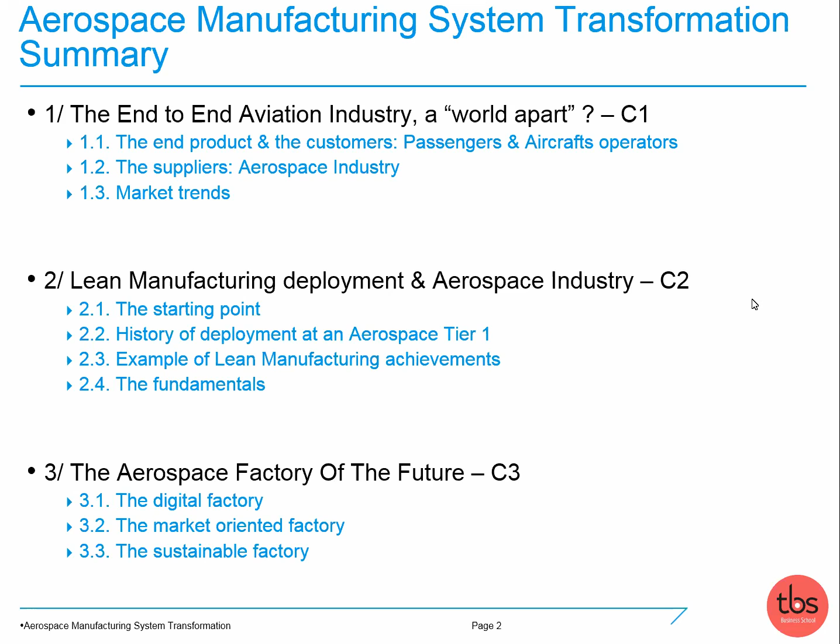Yes, perfect. Okay, so thanks, and let's jump into the topic now. So the first course is, as said, an understanding of this specific sector of aviation.

I raise the question because to a certain extent it's a specific sector. In many aspects it's one industrial sector like many others, but I will try to explain what makes it a little bit different from the others.

The first chapter will be on the customers, ourselves as passengers, and the aircraft operators. I will mainly focus on commercial aviation, so aircraft operators will be airlines, but I'll say a few words on the other aircraft operators, which are the air forces from the countries or the space system companies.

The second chapter will be on the suppliers. This will be more industrial, not really technical, but we'll be talking about what is around the industry. Then the last chapter will focus on the market trends in this aviation sector.

For the end customer that we are, and the airlines, what is an aircraft? If I take the example of the A380, the last aircraft will soon be delivered by Airbus, but there are 250 aircraft flying in the world. It's a fantastic aircraft, I had the chance to fly on it once some years ago, and it will fly for probably several decades. So I'm sure you will fly on it, and it will pull many MRO businesses, many cabin refurbishments, because a cabin on that kind of aircraft is changed every 8 years on average.

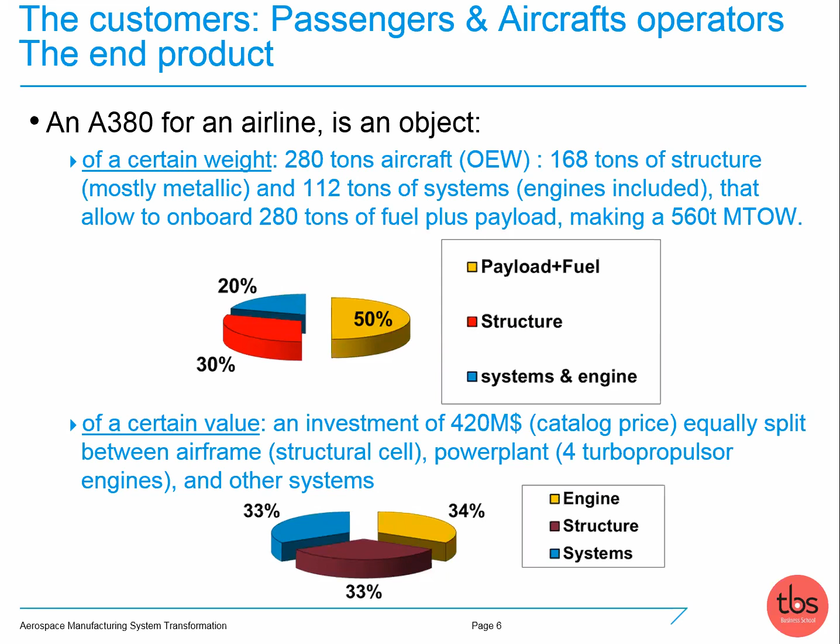So that's interesting to note, the engines are a big part of the price of the aircraft, which means that from a cash perspective, and because Airbus or Boeing or the aircraft manufacturers are not making the engines, you may imagine that they will have a supply chain approach to minimize the cash from the engine procurement and to assemble it at the latest time. But we'll come back to it later.

Okay, of course it flies, but this is important. This means that unlike a train or a car, it is surrounded with more potential danger. Danger of dropping because of a flying failure, and this would mean danger for transported passengers and goods, but also for the population that would be exposed to a crash.

But also it's a danger in terms of what you can see from being above, because an aircraft is flying over territories that in many cases are national territories. And on all national territories, there are safety areas that you don't want some foreign entity to look at, to make pictures of, or to approach.

So for all these reasons, aviation transportation is a sector that is closely monitored by very important public authorities that are constantly seeking zero risk operation.

So if we continue to look at the market from the customer perspective, what are the passengers and the airline expecting from, what are the expectations from a product utilization point of view?

The airlines, of course, are pulled by the market evolution, and they are trying to offer the best product so that they follow the market trends. First, since several decades, they have worked on the fly hour cost. This is obvious, by playing on fuel consumption, reducing it, seat density, more seats in an aircraft, aircraft weight, lighter aircraft, better efficiency of aircraft use, working on operational performance, on reduced maintenance time, so that the aircraft can fly most of its time.

This has pulled the business activity of the MRO, which are the companies delivering, among other things, maintenance services. This has also pulled changes in the aircraft architectures, pushing the emergence of new versions of aircraft, new aircraft, and you have here an illustration of

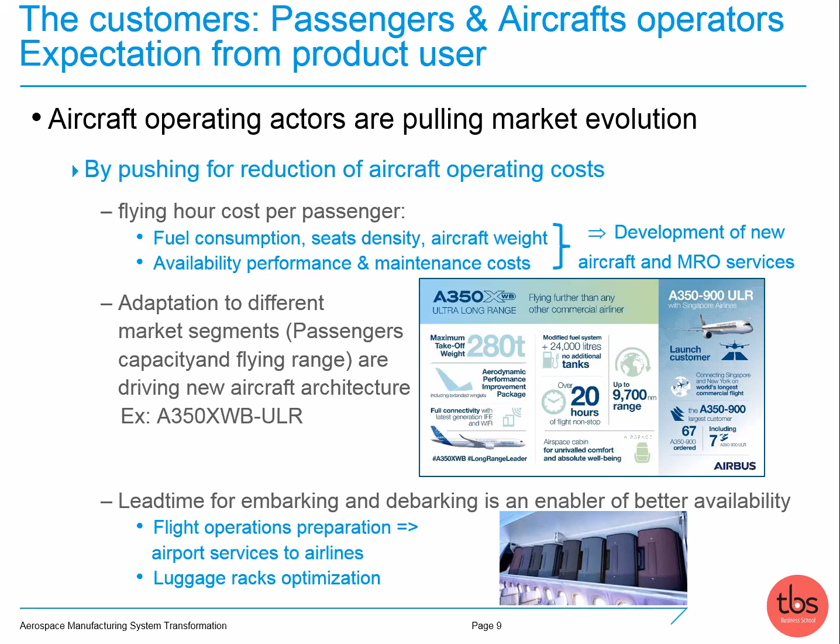They have worked also, Airbus, on the luggage volume with improved storing of luggage.

Also working on reduction of fuel burn in taxi operations at airports. All aircraft are using their fuel engines to move on their wheels on the airport, and electric systems to drive the wheels are being developed to be a CO2 free system

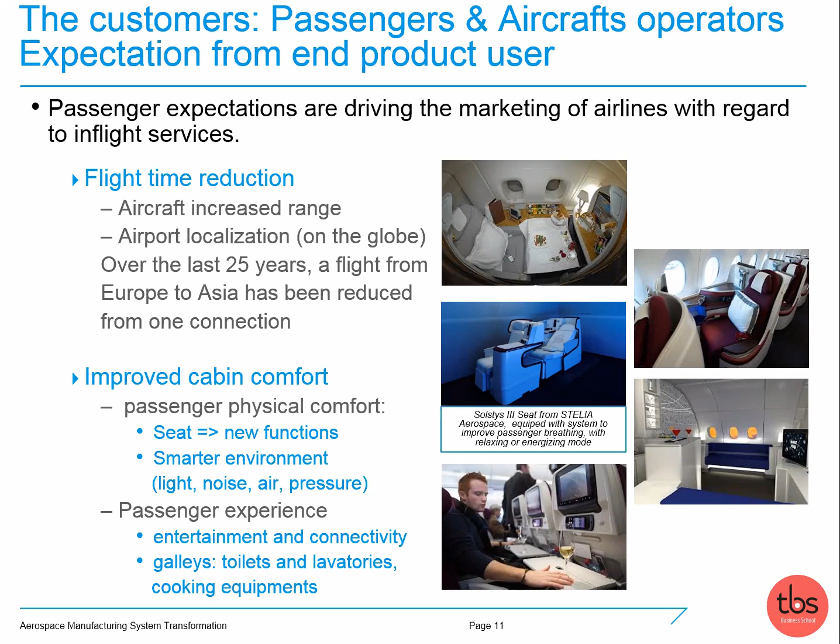Also, to reduce price of tickets, there has been the emergence of low-cost airline operators. This is about a 20-year-old segment, maybe a little less, about 20 years. If I take the price of tickets you can buy today at a major European low cost to fly to Paris, Berlin, or Amsterdam from Toulouse, the lowest price you can get, I definitely could not get in the best case when I was in Toulouse school 30 years ago.

Embarking time: I used to come 2 hours ahead of the flight takeoff to the airport. Now you know that you can come 45 minutes, or if you like to play, maybe 30 minutes in Toulouse. So this has greatly improved, and many other services in the airport are very attractive and efficient.

Short video about the A350, an aircraft introduced in 2015 in terms of commercial operation with Qatar Airways. There are now about 400 aircraft flying in the world. Airbus has sold close to 1,000 aircraft, so they still have a backlog of 500 aircraft to deliver. And even in the tough present commercial times of post-COVID for the aerospace industry, they still have delivered this year about 40 to 45 aircraft, so it's not that bad.

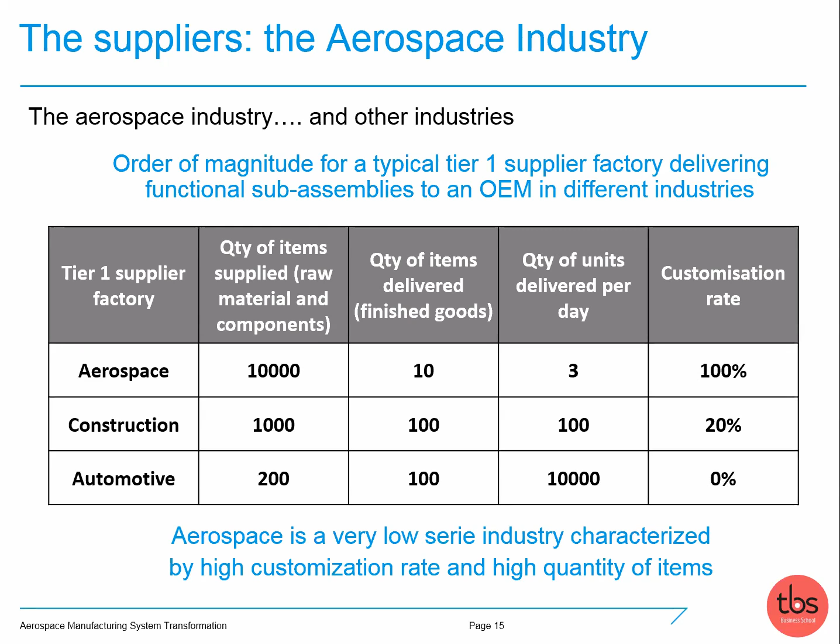And going with that, you have customization. The 3 landing gears will not be the same, the 3 aircraft are not the same. In the 10,000 automotive parts, they are not all the same, but you may have 1,500 steering wheels that are the same for Ford or whichever car.

In the aerospace segment, probably the major specificity is the importance of product development. I told you for the A350, development starts in 2008, first entry in service end of 2015 - close to 8 years of development, with dozens of billions of euros. For Airbus, it was close to 15 billion euros. For Stelia Aerospace, one tier supplier, it was $500 million.

Among the R&D costs, the factories, the engineers - up to 700 people in the design office. So it's massive. Hexcel has been developing and is manufacturing 53% of the composite material in an A350 aircraft, so many tons of composite materials that we deliver to Airbus every day.

This is a $1 billion investment. As an example, within that billion you have several composite plants, 500 meters long, several hundred million investment each, with highly complex chemical processes to produce a specific carbon fiber that is weaved, impregnated, cured and assembled finally to make the panels. So this is the first important thing: massive investment, massive development challenges.

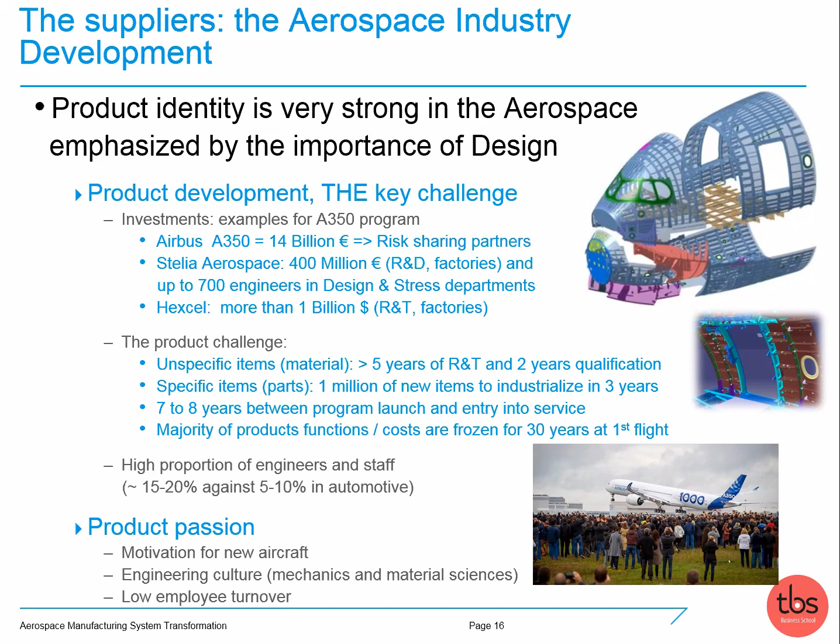Another dimension of this complexity is in the IT infrastructure. Information technology is used to manage all the data and all the tasks, because as long as you have more than one employee, part of the job is to communicate between people, functions, departments, plants, subsidiaries, customers, suppliers - and to do that efficiently you need tools. The tools supporting communication are, in many cases, information technology tools, designed according to the nature of the object you want to communicate.

An object can be very various. When you think of a 3D CAD model developed in software like Dassault Catia, or the new Dassault 3DX solution, this is about creating a shape, a 3D shape, a volume. If you talk about other data dealing with business measures, cost, price, you're more in a system for transferring orders of procuring goods, selling goods, distributing goods - and these are more what we call ERP, enterprise resource planning.

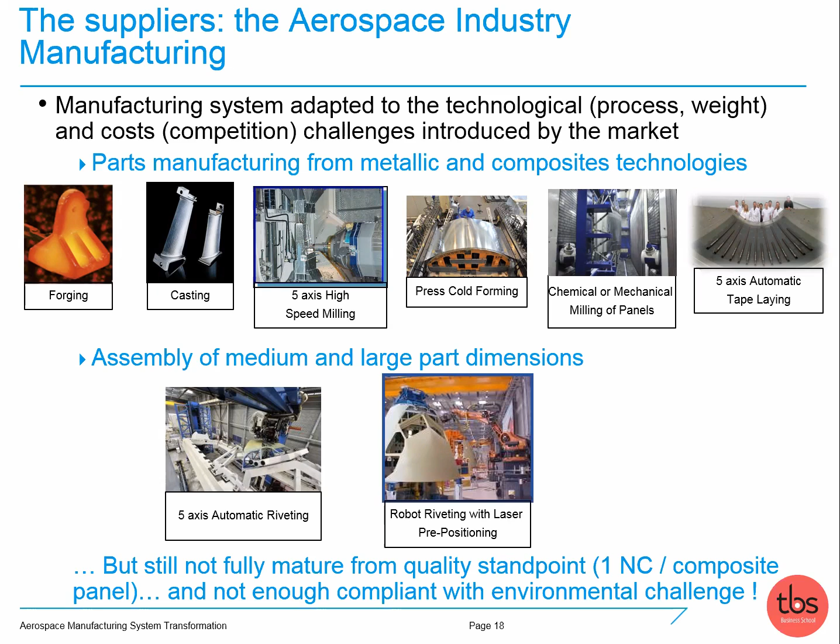Like you may imagine, the place of human is very important on the shop floor. We have a lot of complex automatic machines, but we have many experienced workers necessary to assist, to support, to solve some of the complex technical processes we are operating. And going with this highly skilled population, we have a heritage of competence development that is specific to our sector.

One example is with the words. I will make a small switch in French - I'm sure non-French speakers will be helped by the French one. In all my years in non-aerospace industry, the word to name shop floor employees was workers or operators. In the aerospace industry, at Airbus, at Stelia, at all specific parts companies, you are not talking of operators or workers - you may use the word, but you are really talking of 'compagnon' in French. So not 'ouvrier' or 'opérateur', but 'compagnon', like 'compagnonnage'. This companionship is the heritage of this sector, still used to train a lot of processes.

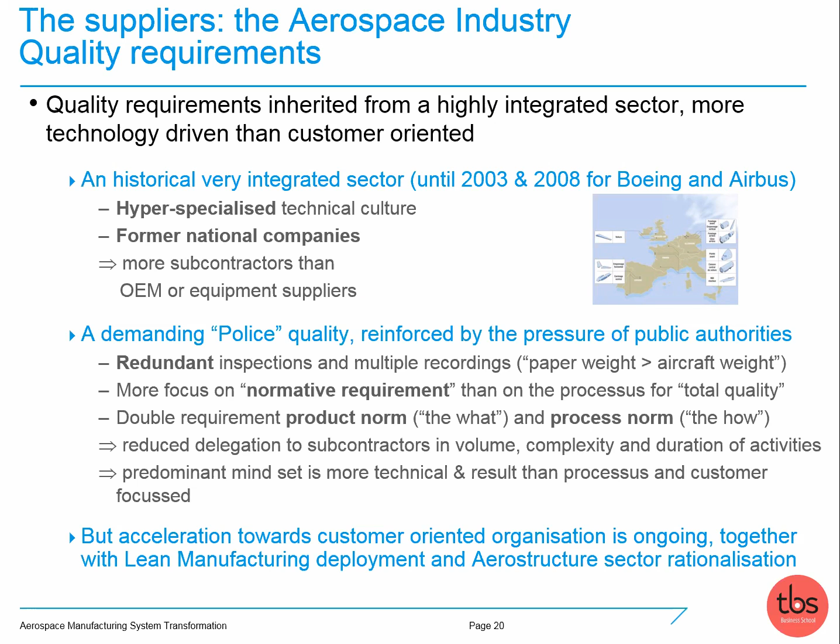And therefore, the kind of quality that we have, with this past and with the big presence of public institutions that monitor our industry, all this explains that our quality is more 'police quality' than 'total quality.' We are more driven by product norms, by a double requirement of how to do and what to do, rather than a total quality mindset inherited from the Toyota system. It is changing - we are progressively coming to total quality, but moving slowly because the weight of this normative culture is very important. So we are entering lean manufacturing, and we'll discuss this again in the second part of today's course, but it's coming slowly.

Another important point of the specificities of industrial players in aerospace is that we are handling big dimensions. So our logistics system, all the systems that manage movement, transport, and storage from one place to another, are working with these big dimensions. It can be trucks, trains, river boats, sea boats, aircraft. In the Boeing world, in the Airbus world, this is always big dimensions.

Because of what I explained previously, being only recently on a competitive industrial market, our supply chain performance, our flow expertise, is less than in other segments. You can find that with typical indicators like inventory turns. Inventory turn is the time to renew an inventory of a company. In our company, you can count it on your hands, so 1 to 5. You may find some benchmark players at close to 10 in aerospace, but it's very low.

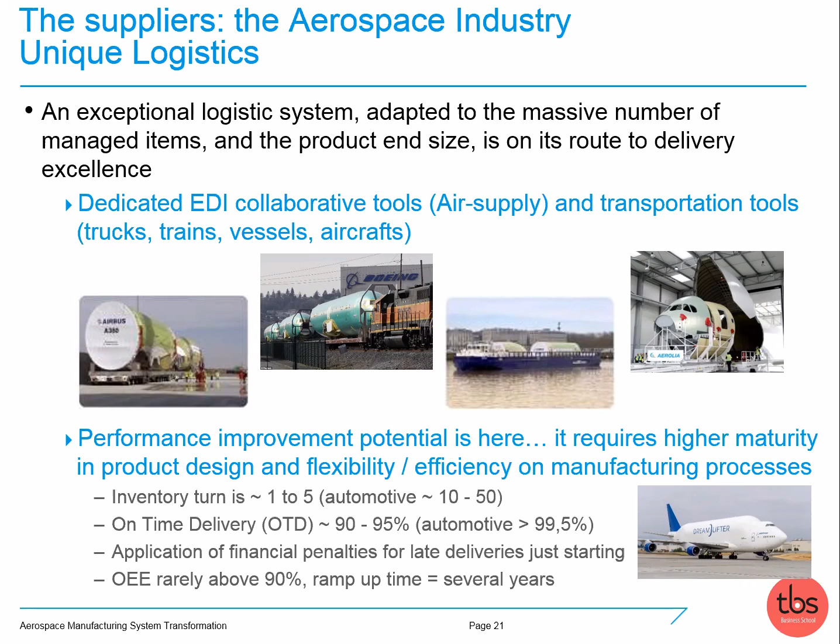On time delivery, the adherence in delivering on time, in other industries like automotive, electronics, consumer goods, food distribution like Carrefour, Auchan, and others, you are higher than 99, 99.5, 99.9. In our industry, we are more in the range of 95. The best suppliers are at 99, but you can count them on one hand. Demanding rules for efficient supply chain, like financial penalties for late delivery, are daily applied in automotive, food, and electronic industries. In aerospace, it's much less frequent because we are not yet at that level of maturity.

Market trends. Quickly, what do we see in this sector in terms of changes, trends, and evolutions? First, and very important, we will talk about this again in the last course, the Aerospace Factory of the Future. It's an incredible sector with about 5% growth since more than 2 generations, since the end of World War II. We have seen increases in activity between 3 and 10%. We have regular crises with world events, geopolitical threats, wars, energy threats, fuel crises, now COVID. But all the time, it has averaged about 5% growth. Will COVID change it? I will not answer now. We could debate that. We will try to share reflections on that in the last course on December 17. So until COVID, it was a sector with incredible yearly growth.

Second, intracontinental traffic is now operated by low-cost companies. They didn't exist 20 years ago, but now they are major actors in this sector. Third, intercontinental traffic has really accelerated over the last decades, mainly with the entry of new actors from emerging countries, mostly Middle East and Southeast Asia. They have an optimized position on the globe, between the US, Europe, and Asia, which enables them, with modern aircraft, to fly without stop from one capital to another. And I won't even comment on the price of kerosene, which in some countries is, unofficially, lower than in others.

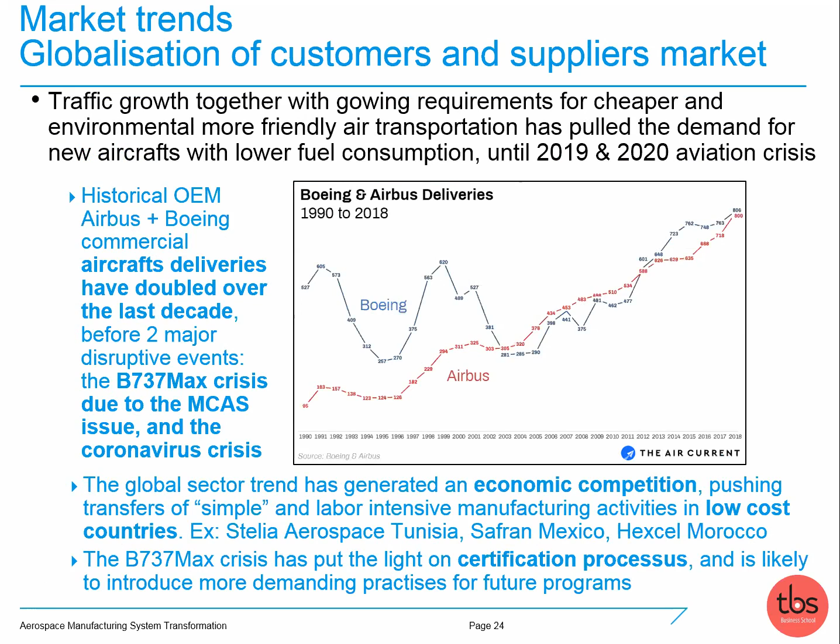Definitely, it is a crisis with an amplitude that we have never lived in aerospace in history, in aviation history. And not only by the amplitude, but also by the duration. And why it will last long, it's because it is a simultaneous pandemic, economic, and geopolitical crisis that affects us.

The pandemic measures are reducing the air travel, as you understand, of course. The economic crisis caused by the pandemic crisis will reduce the ability of citizens and companies to spend money for air travel. The confinement measures are also pushing home office and video conference means as a substitution system to travel, to missions, to physically meet customers or your partner. And last but not least, the general tension between the countries is also placing borderline constraints that are additional barriers to air travel.

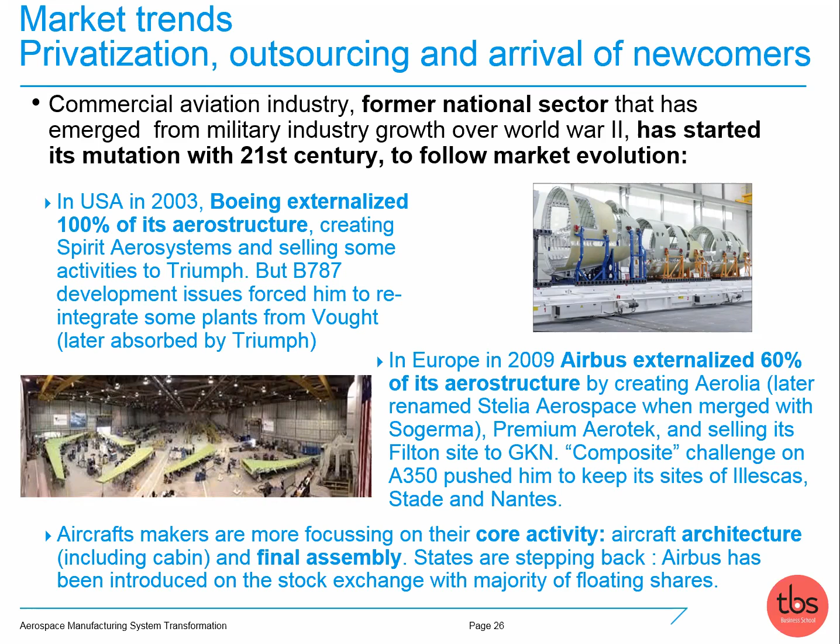In regards to the military market, a few words on that. Military sales around the globe are monitored with several laws, and one of them is offset laws. When a selling country, or a selling party, is having business with a country for a military product, the selling party must give compensations along with this military business. These kinds of laws typically explain the Dassault-Reliance deal that goes along the sale of 36 Dassault Rafale to India. And this has a little bit influenced the commercial markets with what we call compensation markets.

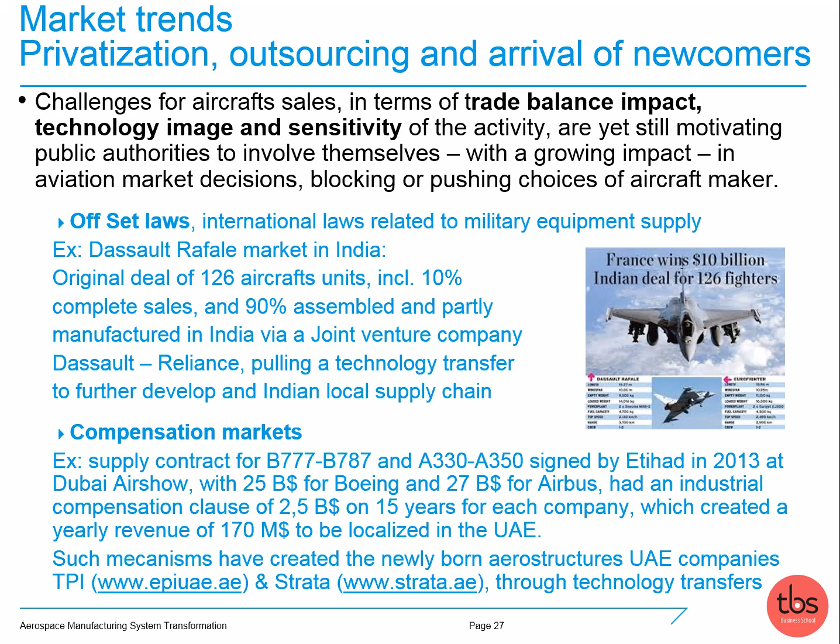So it's not laws, but a similar business practice that started to appear by the end of the 90s with China, and grew to big dimensions in the beginning of the 21st century in the Middle East, where airlines like Etihad, supported by Abu Dhabi, Emirates, and the UAE, have forced Airbus and Boeing to give big compensation of business against the sale of large numbers of aircraft. This has pushed the creation of completely new actors, like the two company names on the slide, that were born thanks to technology transfers operated by Airbus and Boeing to enable them to enter the playground of aerospace industrial countries.

Other changes in the aircraft industry: because of the growth and nice health of this business until last year, there were a lot of companies trying to enter the segment of commercial aircraft of more than 100 seats. It was the case of Bombardier with the C-Series, of Comac with the C919 in China, and of Embraer in Brazil with the E2-195.

I won't tell the whole story, but you can notice that to prevent entry of a third player, Airbus and Boeing played a certain number of cards, trying to distance Comac with the A320neo and the B737 MAX, improving aircraft efficiency to distance the C919, which would be more comparable to an old A320 or B737. Also, Airbus has taken over Bombardier's C-Series, now named A220, so they have killed that competitor. Boeing tried to do the same with Embraer, but was prevented from doing that because of the COVID crisis.

Let's see what comes in the future. So they are trying to compete and keep this duopoly, which is of interest to them, but which is really a specific case. All those businesses are driven by dollar, it's not a place for euro. There are also big corporations, like CFM with GE and Snecma, a 40-year-old corporation, as an example. And there are a lot of relations with states when it comes to the defense market.

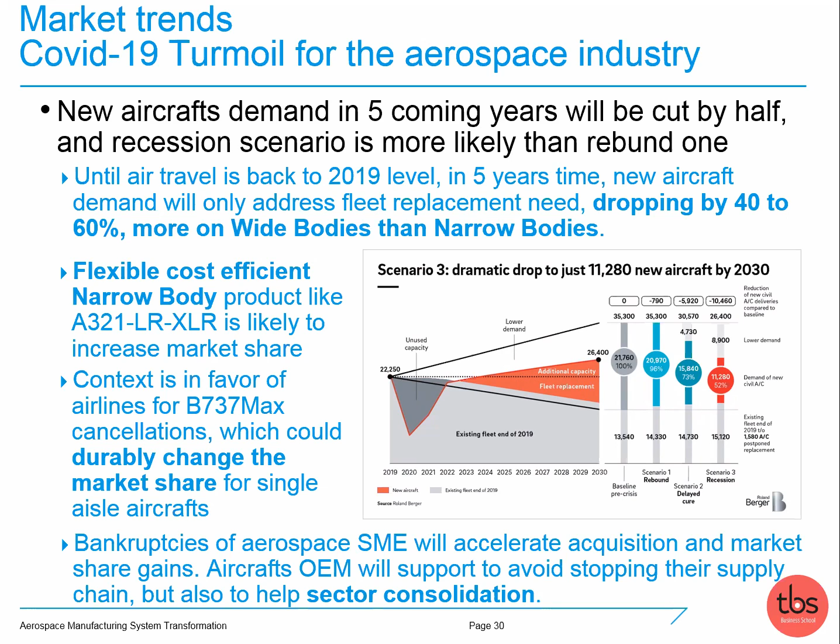Again, we'll see that. Trend for the future: aviation transport will push changes in the services industry around the airports. Some people are talking of aerotropolis evolutions, which is, I would say, an evolution of the geographic systems around an airport that combines airport operations and urban areas. Let's see, there are big projects. Some have opened, like the new Istanbul airport, and in Dubai they also have a big project.

There are big projects coming with UAM. Lilium has announced a project for an aerotropolis zone in Florida, US. This was some days ago. So they think of an aerotropolis urban organization around their Lilium Jet taxi future service. UAM is a new segment. Many operators—most of them will not survive, but several will be successful. They will address short distance range, they will address urban taxis. Let's see, it's a complex and very interesting future segment.

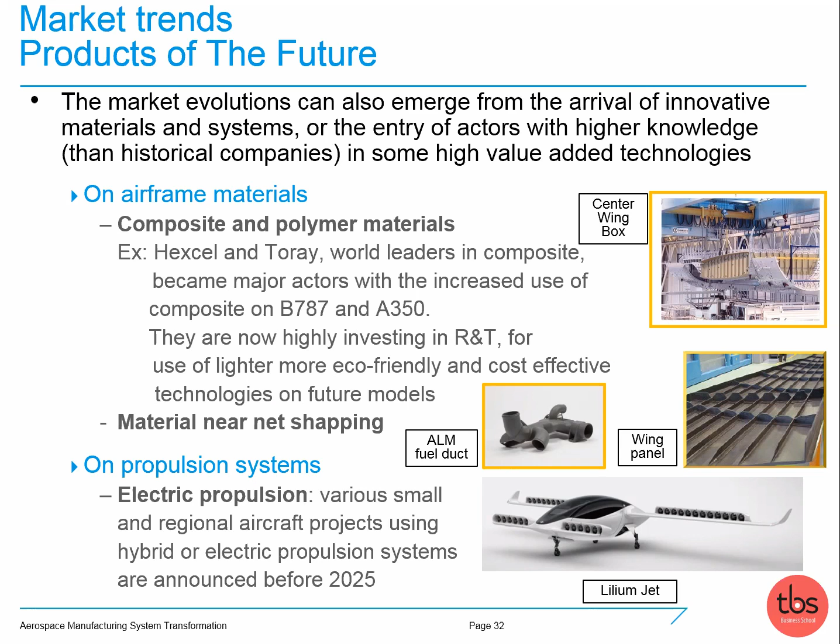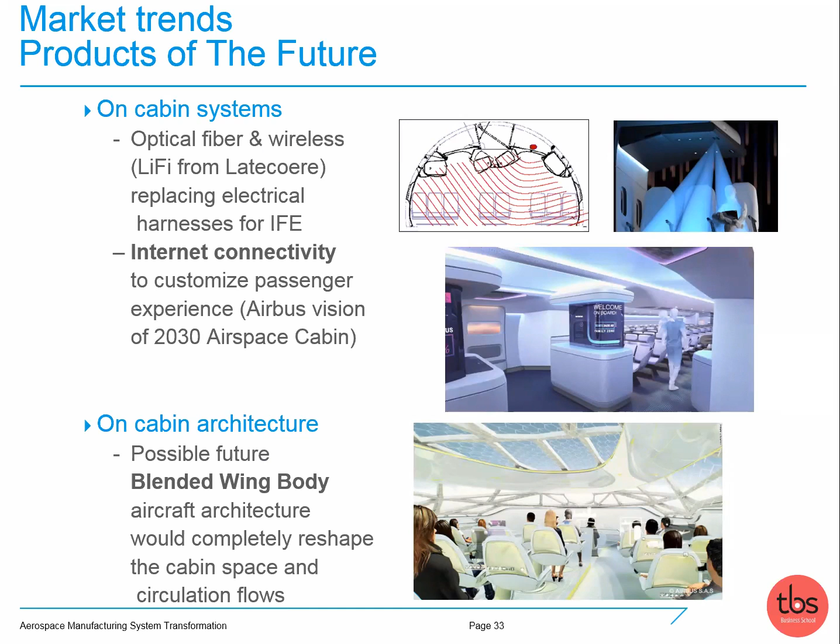We'll discuss later. Cabin evolution with more connectivity to customize the passenger services even before flight. Cabin architecture may change with new projects in the future. And I will stop with that because we could talk a lot. Very short video with the Airbus demonstrator of blended wing body concept.

Situation will partly reshape the sector.

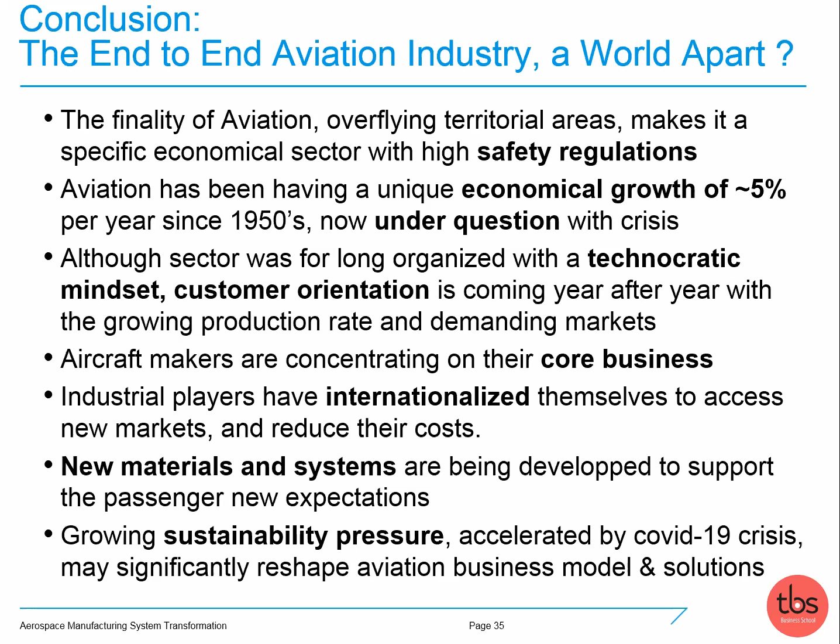We have started. It is significant improvement, minus two-thirds with the Twizy from Renault, minus 98% if you take your electric bicycle instead of a car. But I agree, we miss some functions—the full service is not provided here.

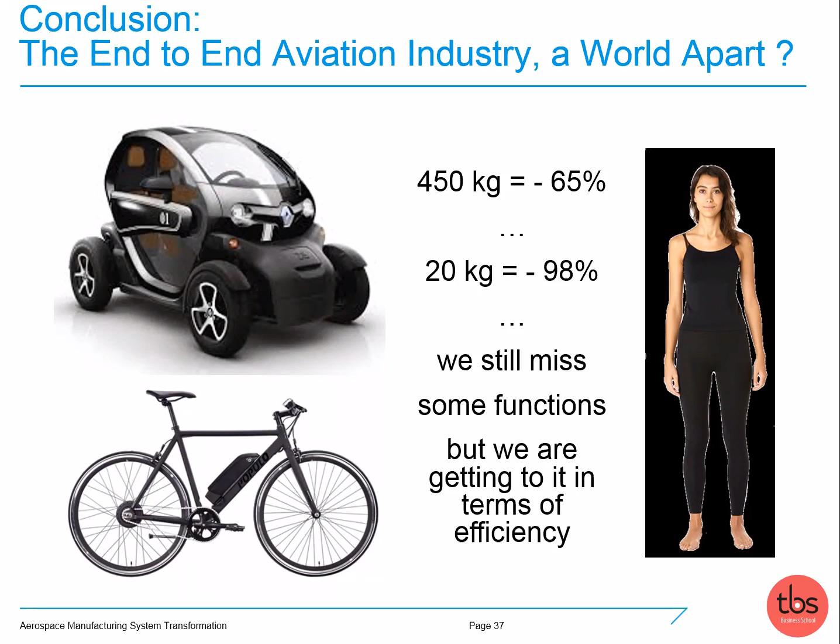Anyway, we have invented and flown Solar Impulse, a world tour without a single CO2 emission to operate the aircraft. To manufacture it, there are batteries, there are solar cells, there are composites, so definitely there was CO2 to manufacture Solar Impulse. But Bertrand Piccard and his colleague flew around the globe without a single burn of fuel. So if we have been able to do that, I'm sure we'll be able to design and fly the 2030 low emission aircraft.

I disagree with the zero emission. I think it's not feasible.

Like Lavoisier said,

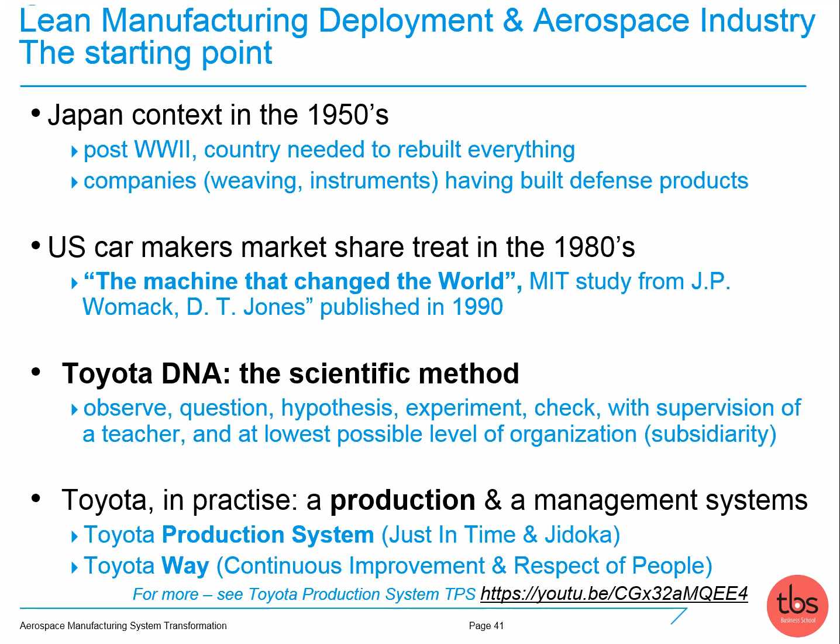It is an interesting 8-minute video that explains the Toyota production system using the example of Toyota forklift vehicle. So it's quite interesting. It's in English, so you will have no issue to understand.

In aerospace, as said an hour ago, we don't have a century of serial industry culture like automotive. We are not in the world of producing T-Ford black cars like in Charlie Chaplin movie and repeating same activity every 10 seconds. Yet we are producing

today at Airbus 2 A320 per day, 1 A350 per week, post-COVID. So it is still the world of small series.

And to start understanding what this was, Boeing sent some executives to Japan about 20 years ago. And this first inspired Boeing in the reorganization of its Seattle assembly line of the 737 in Renton. And I will display a short video of this organization in a minute.

Airbus did not send executives to Japan, but Airbus did, a little bit copying Boeing and inspired by the automotive company. Airbus CEO for a short period was Christian Streiff, formerly CEO of Saint-Gobain and PSA.

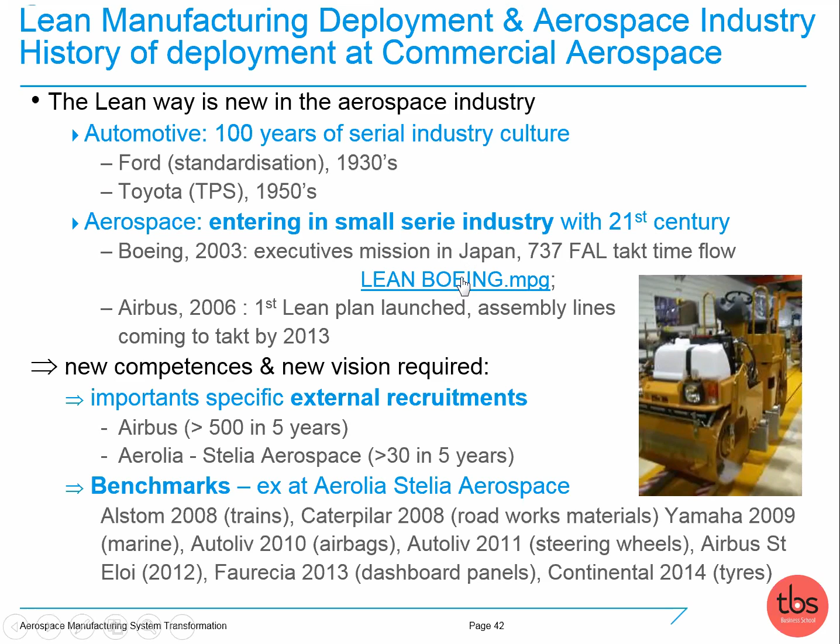Okay, short movie. It's more than 15 years old, a little old-fashioned, but interesting to see how they reorganized the line.

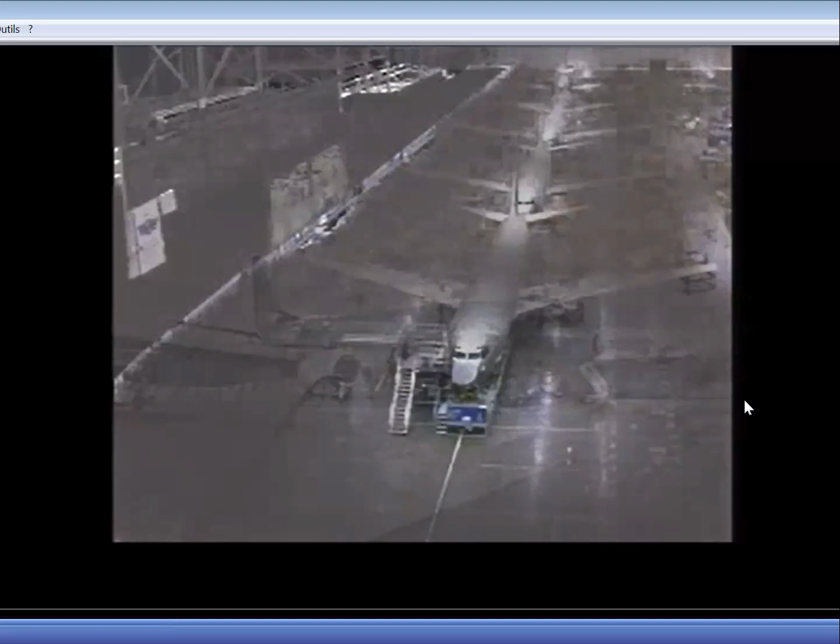So it's the final assembly line for the 737, the original model before the MAX. It's the hall where they assemble all the systems. An empty aircraft enters the hall without any systems, just the structure. It's an assembly line, a moving line like an automotive car line, but very slowly, a couple of centimeters per minute.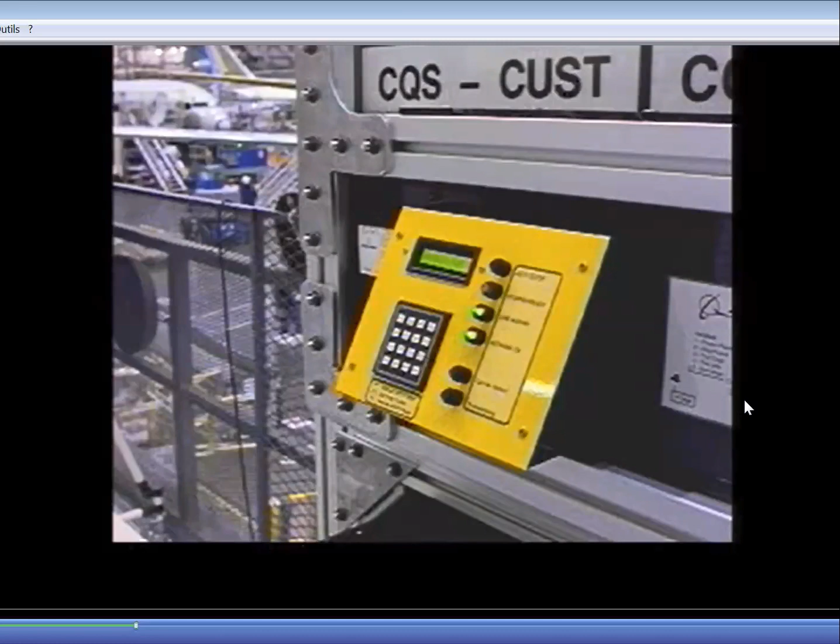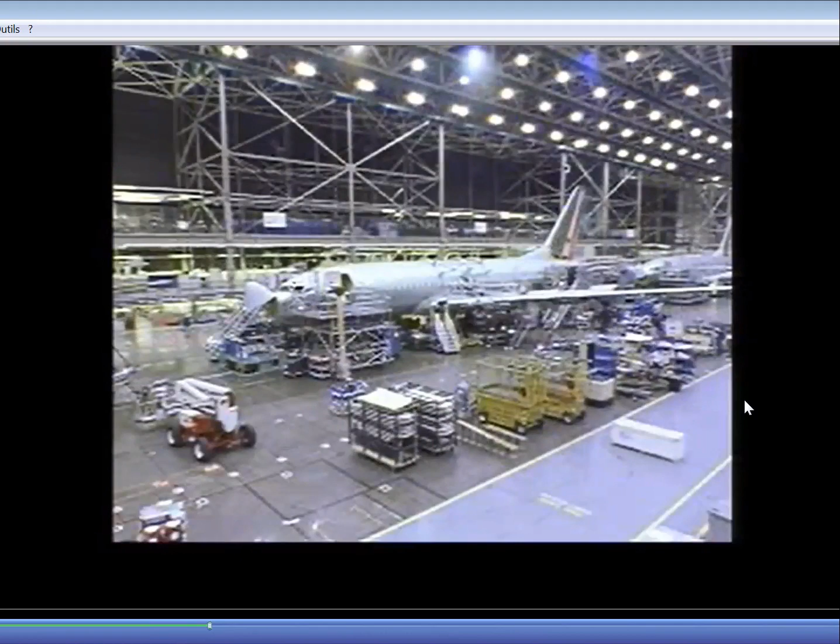2-3 centimeters per minute. You can see the small trolleys delivering the components and tools to assemble each system, and the aircraft slowly moving. The rate was about 2 aircraft per day at that time. So one aircraft takes the place of the previous one in about 8 hours, because the plant operates 16 hours per day in 2 shifts.

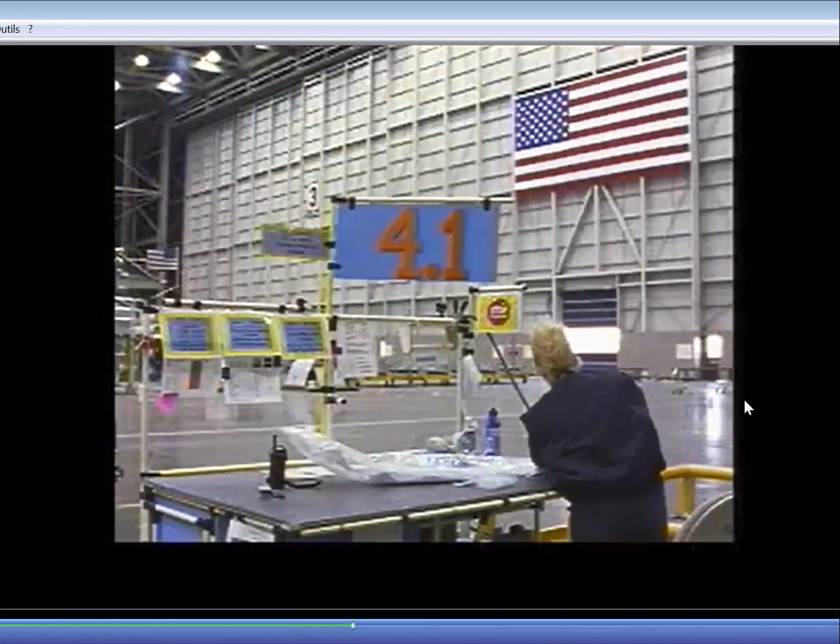You can see simple systems to handle the engines, manually operated, much more flexible than a crane would be. You don't see big machines, you see a lot of humans - it's more flexible. There are small assembly stations on the side of the line to compensate for variation in workload from operator to operator, because one aircraft differs from the next, so operator workload may vary, and you need to compensate to keep the operator busy.

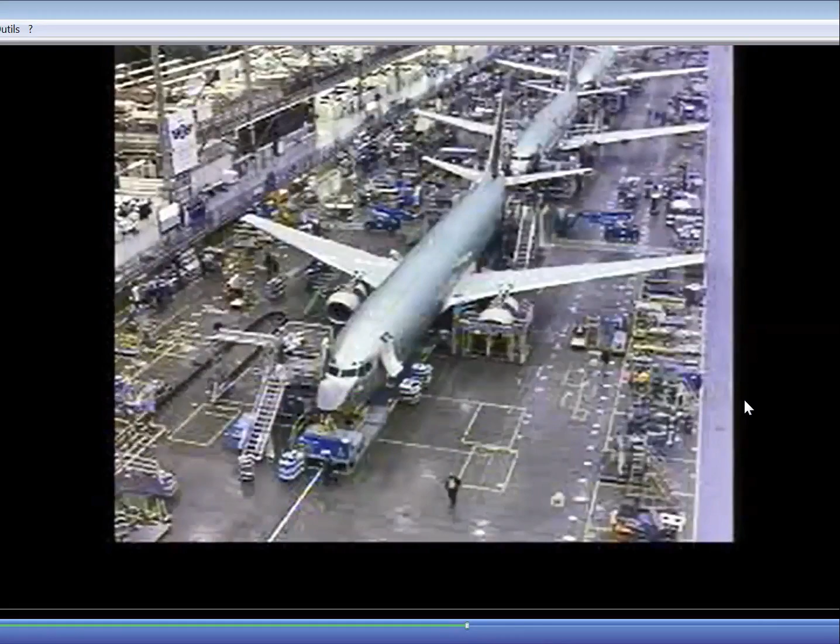Here you see technical people helping production solve an issue, with alerts given by the Andon system. The small light is called Andon, which means light in Japanese, and it's used to call technical people for help.

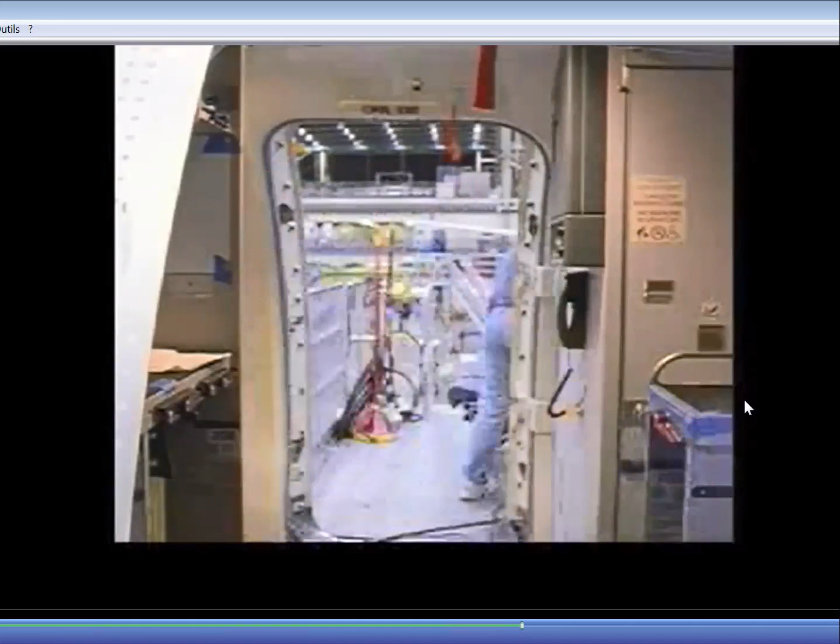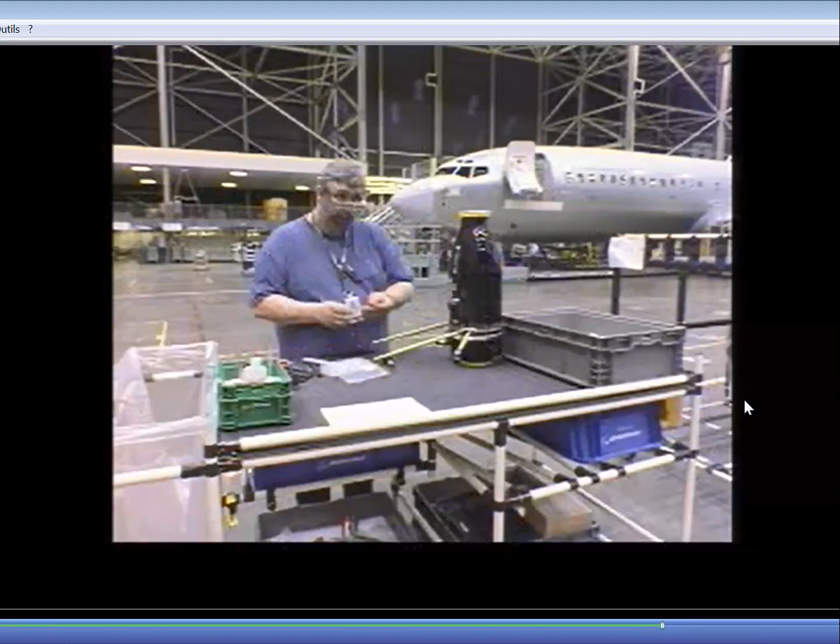The moving line has the benefit of pulling the flow, and pulling the flow forces the organization to solve issues, whether quality, technical, or delivery issues. Those need to be solved ahead of the line, because if not, the line will be stopped, and if you stop the line, you stop all the aircraft, and then you have a big nightmare.

A few seconds ago, you saw a small ticket - it's a Kanban card, a small paper card used to act as a Kanban. A Kanban is a pull flow system, a tool to generate replenishment of the consumption of goods at one step of the process. For example, it's used to replace a component consumed from a trolley because it was assembled on the aircraft. The card is sent back to the warehouse as a signal for the logistics team to place a new component in the trolley and send it back to the line side for the next aircraft.

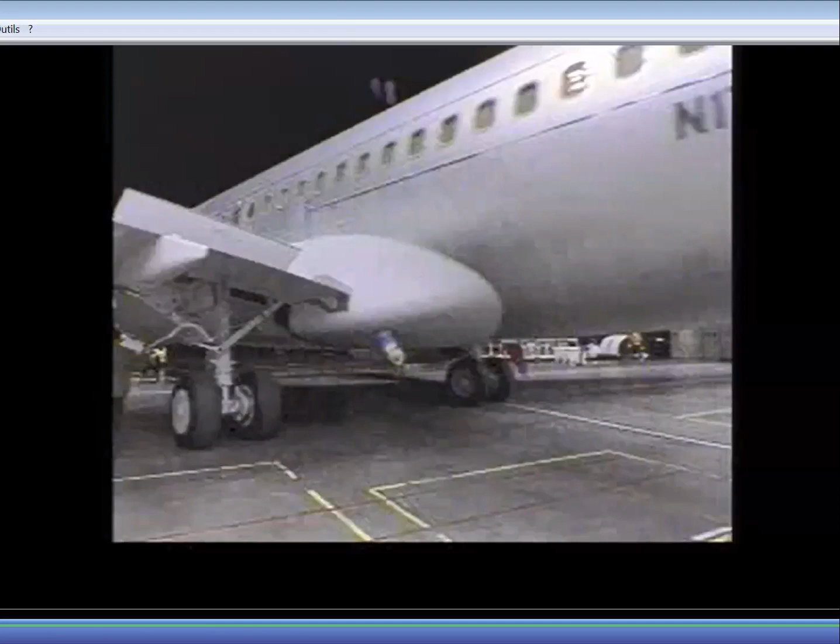How did we deploy lean manufacturing at Aerolia?

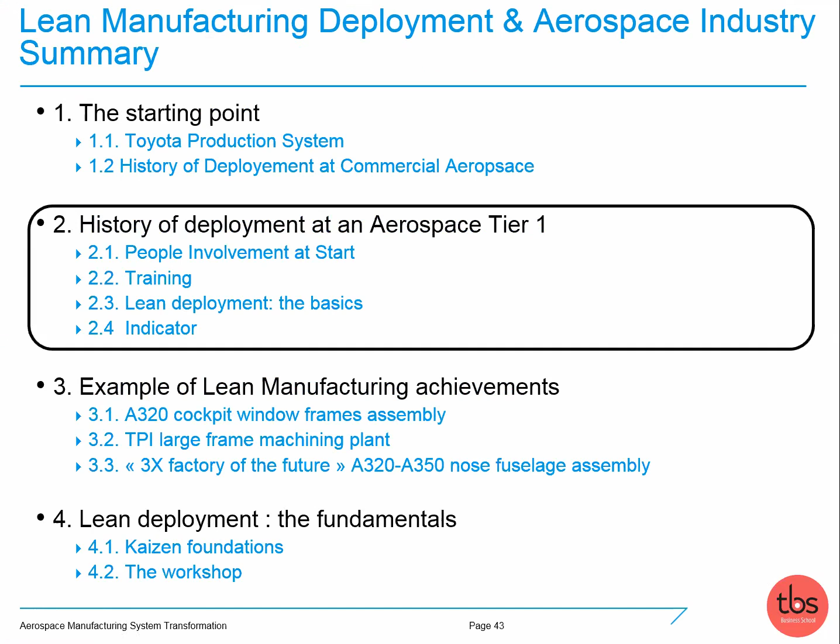After having recruited a couple of people, at the real start, we had a lot of our work, which was explaining, motivating, and supporting the understanding of managers and team leaders of why we were pushing these new ways of working. It's not easy - you can't achieve that in a day.

You need to start with the population that is doing the job. When working in a production hall, you need to start with the operators, the companions - the blue collars. And you first need to separate from these caricatural images of automotive industry, of a Japanese way of working, because there's a kind of pride in the aerospace sector due to the highly skilled population and product complexity. So trying to mimic the example of automotive is definitely not the right approach.

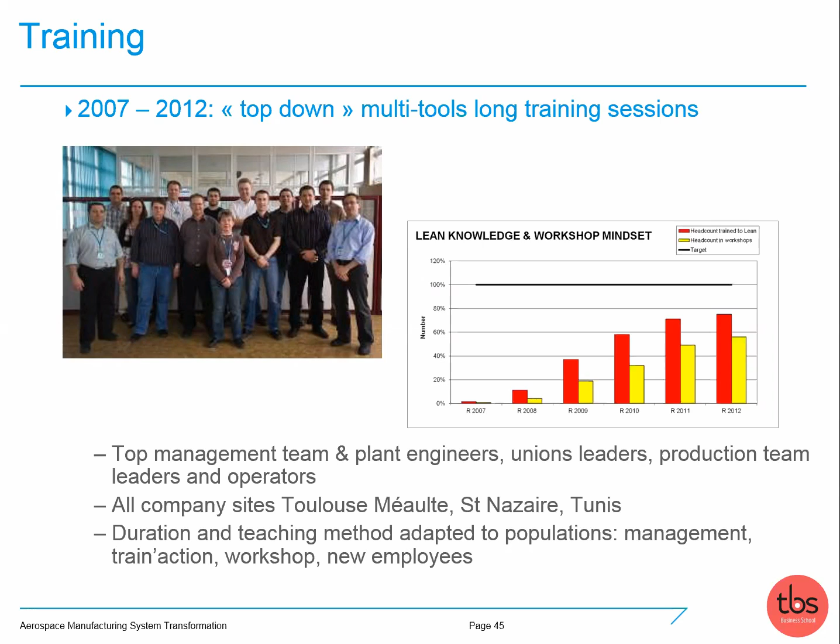There was some training specific to one tool lasting 10 minutes, and other trainings for heads of plants lasting two weeks - customized to the role of the different populations. With years, the training tended to become more specific, shorter, and used for specific purposes. The first years aimed at growing adhesion, understanding, and culture. After some years, in 2013, the need was no longer about culture - the need was to build a system and make tools available to the right employee in the right context. To support that, there was a lot of use of visual management, which we'll see after, and short training modules that are easy for a manager to use.

Imagine you are working as a head of production. Your direct reports are team leaders who are managing operators. When you have a production line issue and the line is stopped for 30 minutes because of a machine breakdown, the team leader has potentially 10 operators and he needs to do something for the half-hour stop of the machine. So having the possibility to do a short training with ready-to-use training modules, that was quite interesting. This was regularly something we did to benefit from non-planned stops and in parallel grow the experience and competence of the production population.

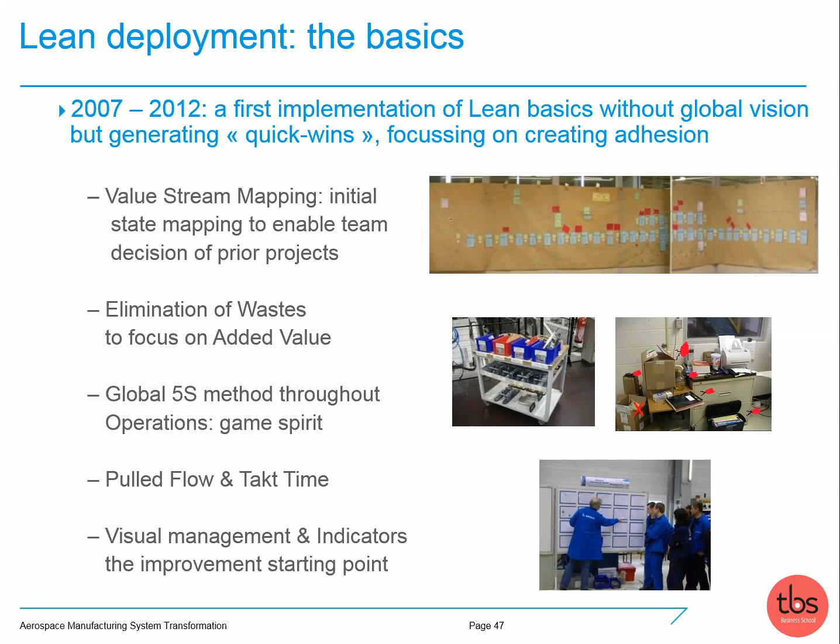One was value stream mapping, which is a tool enabling you to map where your big opportunities are. I will explain in the next slide. Another one was to use waste identification. A third one, very interesting, is 5S, which is very simple but helps a lot and is a very accessible tool. Pull flow system is also something we worked around, and visual management. So now I'll spend a few minutes explaining those 5 tools.

Value stream mapping is an exercise you perform with a team of several functions representative of all competence in a plant area. Typically, if you consider a product line that goes from end to end throughout a workshop, throughout a shop floor, you will, with the team, physically walk around the product flow from the warehouse of raw material through each station of the manufacturing line and out to the finished product warehouse.

At each and every step where you see product, you question the inputs, the outputs, and the performance of the product. You also collect all issues you have been seeing. It can be quality issues, or whatever is questioning the team. That's why it's good to have a team with different functions, because all team members will see different things. You capture all this with a certain methodology.

You put that on a large panel. Here is the picture of the one we did on the A380 nose fuselage section. If you perform that on all the product lines throughout the plant, you can at the end compare the different areas of issues and their importance, because you have all the data around inputs and outputs - volumes, lead times, cycles, labor times, machine times. So you can categorize, and in the end have the priority project emerge as the one with the biggest potential of waste reduction.

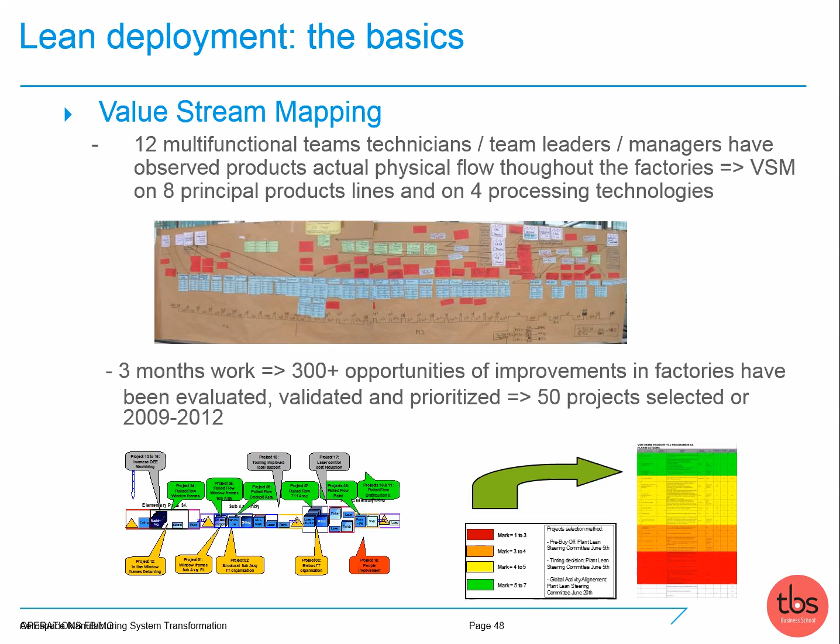Added value culture. The most interesting definition of added value is the following: the added value is what the customer agrees to pay for. The added value is what the customer would agree to pay for.

So generally speaking, focusing on added value is important to identify waste. Having said that, when you walk around the plant, it's difficult to say it's easy to see what is added value and what is not. So practically speaking, to see what is non-added value, we need to look for waste. There are 7 categories of waste in the industrial segment: inventory, waiting of products, defects, overproduction, motion, transportation, and overprocessing.

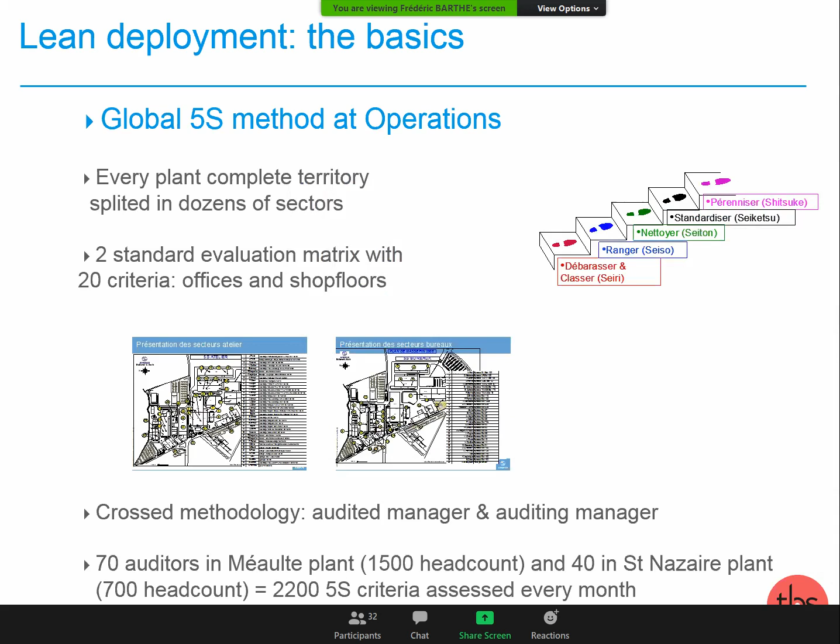I would say, in a game spirit, we had the office people act as auditors of the production sectors, and the production team leaders act as auditors of the office areas. For example, a production team leader of the machining department may have been an auditor of the office from the quality manager, or an auditor from the laboratory office.

We did that on a monthly routine, with an audit provided by the auditors in the production halls and in the office of a white-collar population. Every month we were scoring each sector with a small ceremony to share with the different auditors and management the scoring, the best score, the best improver, and a little coffee and speeches from the head of plant.

And even though it can seem simple and a little like a game, it helped quite a bit in the mindset change.

Pulled flow and takt time. Pulled flow is the planification method for manufacturing where the production order is started thanks to a signal that comes from the customer consumption. So it means that production launch will be done to replenish the consumption of the manufactured product.

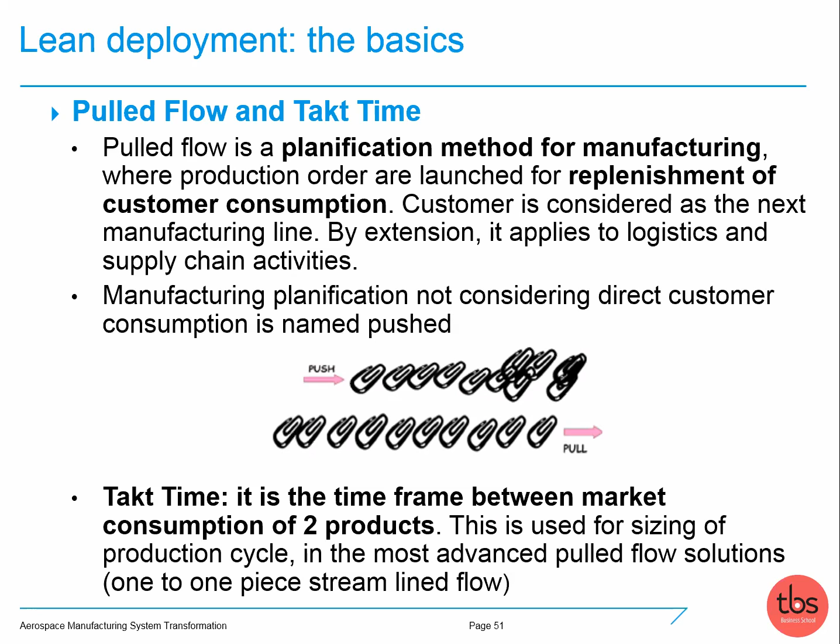Visual management. Visual management tools enable any employee - the word 'any' is important, not only the experienced one - any employee, to have the capability to know what he needs to do according to his job, on a daily basis.

You are a worker, you work on this production line. If your company is a benchmark for visual management, when you have a part in the end, you will know where to put it. When the forklift is delivering some material to the line, the forklift driver will know where to place it.

Even though it's a new forklift driver, recruited just the day before, who doesn't know the line, he will see a sign in the plant that will send him right to the line. On the line side, he will see a place where to deliver his pallet of material.

You are quality technicians, your desk is beside this line. You want to know whether there is a problem. It's the first day of your work.

If the company is a benchmark plant for visual management, you will have a screen that will present the line performance, and you will have andon system small lights that will tell you if there's a problem, and if any, will indicate on which machine there is a problem. You will be able to visually see the performance of the day before with the action plan.

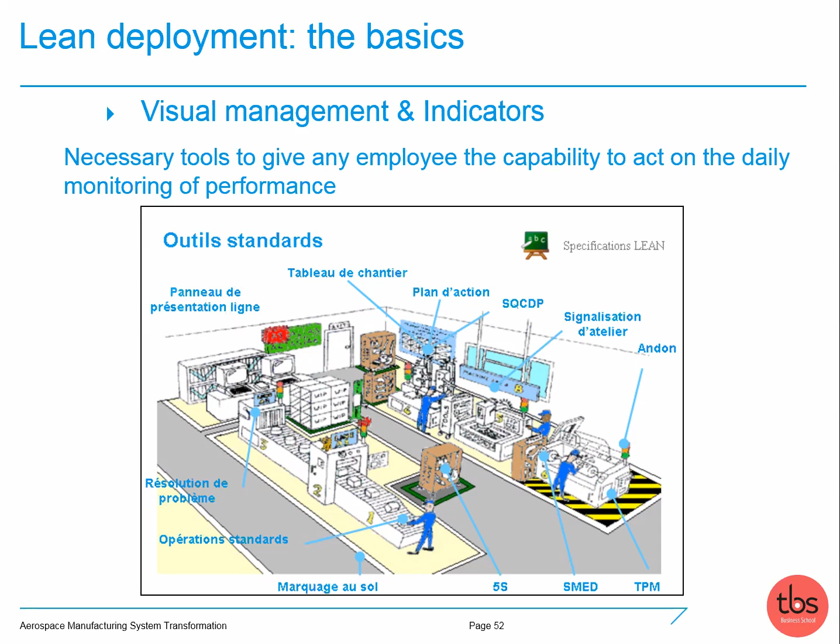Indicator. Why do we need indicator in a company? We need indicator, and we need to have them visual, because a visual indicator is a way to identify some situation that is not in line with the expectation. Some measure, some product, some behavior that is not according to the standard, according to what it should be.

And this is always changing with time. You observe a production line, products are fine, are conformed, and an hour later, all the products are not conformed. There has been an issue, it has been introduced in the last hour, and there has been a growing deviation.

Changing example, safety. You walk around the shop floor, respect of safety rules, where to walk and where not to walk, are strictly respected. And a year later, you walk back in the same production hall, nobody respecting anything. There has been a deviation in between. It has come progressively. Why haven't we been able to identify the deviation at the start?

Because if we do so, the resolution is much easier. The longer you wait before identification of a deviation, the more difficult it will be to get back to the standard.

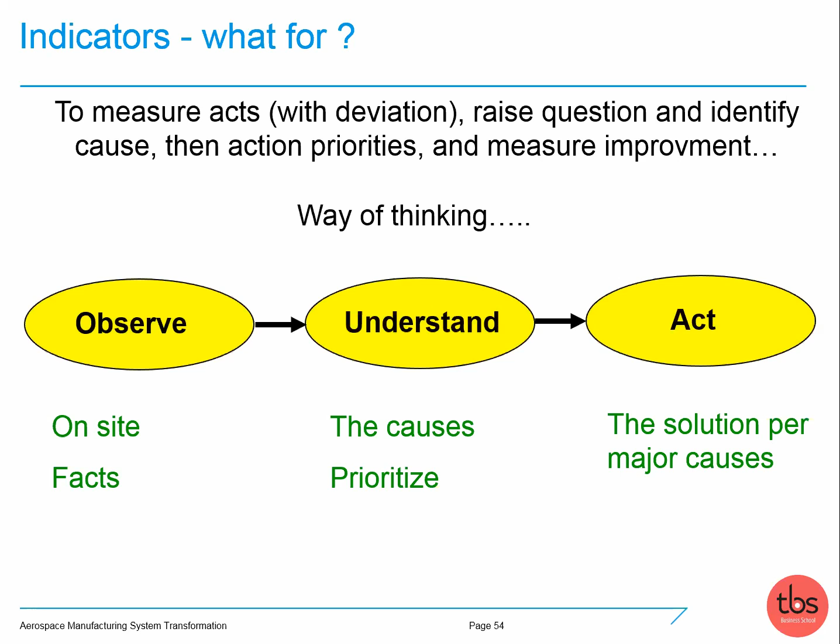You look at the facts. You don't look at what people say, you don't read what people say, you don't listen to what people tell you. You look. Then you try to understand, and you will see some cause. You will start to prioritize the cause. Then, based on the cause, you do assumptions to propose solutions to attack the cause.

What are the topics on which to measure in an industrial company? The topics are the major issues, the major problems, the major deviations: EHS incidents or accidents, environmental health and safety, quality, scrap, concessions, customer complaints, customer returns, cost, labor cost, machine cost, delays, late deliveries, too high inventories, and also people - wrong communication, lack of motivation, absenteeism.

All these are potential areas where, as long as the company is able to identify deviation from a normal state, from a wished state, the company is in a better position to solve the problem and to drive improvement, because improvement always comes after solving problems.

The indicator itself needs to be simple, visual, easy to understand. It needs to be SMART - that is, specific. It's not a global indicator that says many things, it says one thing. It is easy to measure. It is assignable, so you know who is responsible, which area, which perimeter. It needs to be relevant - it's stupid to measure 30 things if only 3 are important. And of course, it needs to be time-based.

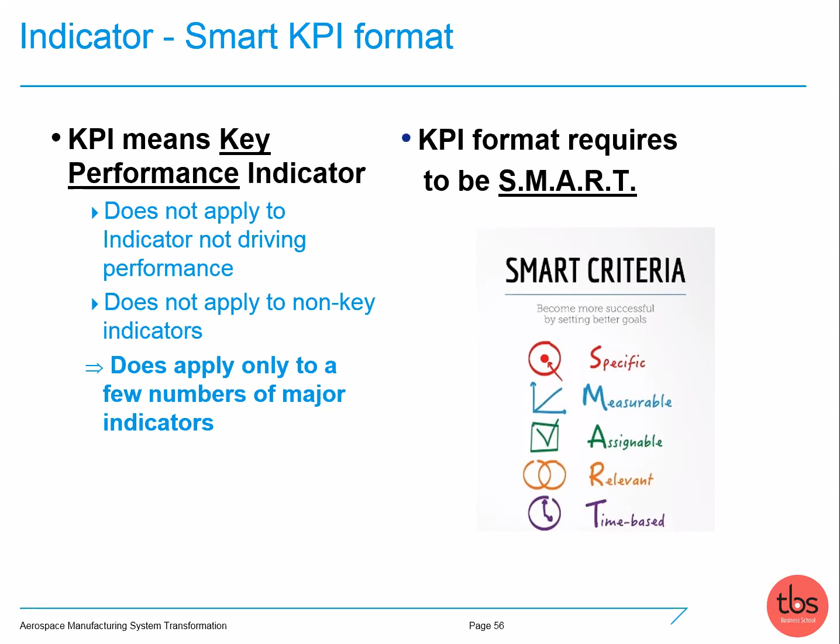A KPI should answer first the 4 questions of performance management. The 4 questions are: where are we versus the target? What is the present measure versus the target measure? Second question: what is the prior cause, the Pareto cause, the 80-20?

I don't care about the minor causes, I care about the major ones - the cause of this gap, the gap between present and expected value. Third question: what are the actions that we are taking against those causes? We want to stop the cause, so we need actions to kill the cause or to reduce them.

And the fourth question that the KPI needs to answer is about the actions we have implemented - are they giving the expected result? Now that they are done, was it the right action? Do we have the result, which means is the cause killed? Because if we took the wrong action, even though we implemented it, the cause is still here.

Second important thing for a KPI: to enable the manager to do his job. The manager is always busy, with an agenda full of things. So if the KPI is not designed in an efficient way, the manager will not use it - it's as simple as that. When it is too complex and takes too much time, the manager hasn't got time to spend understanding a document.

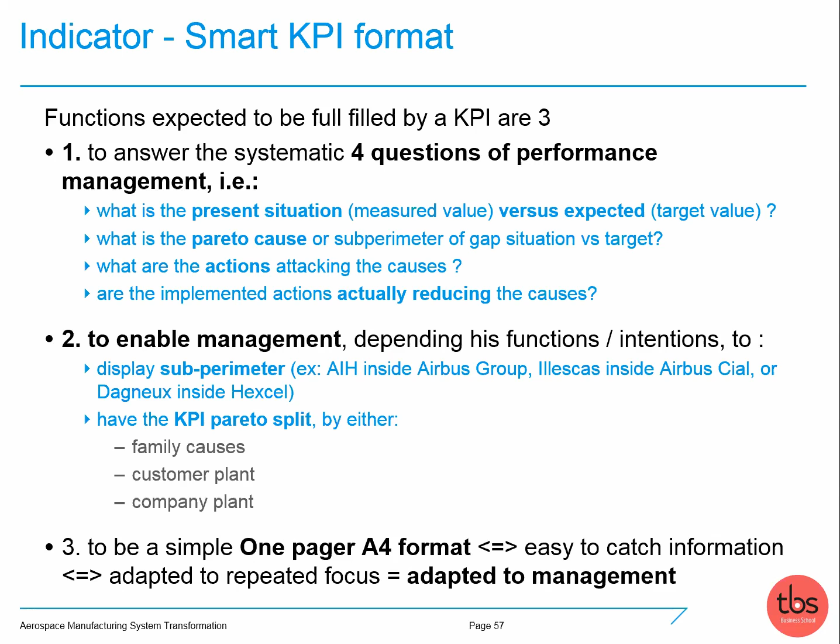And then, as a conclusion, if you want the global KPI to very quickly give all this information, you need to concentrate on a format like this one. It's an example inherited from Ford Motor Company. Ford used to call this a quality operating system. You imagine they call this A4 document, this Excel document, with the word system. Why? It's because it answers my 4 questions.

What is the present situation versus the expectation? These are the monthly performance, and the target is here. So you can see over the last 12 months how you perform against the target. And you can also see in the rear mirror the last 4 years, which is of pretty interest. Because whenever you are down versus the previous months, you still see that it's still much better than the previous months before.

Second, you answer about the Pareto. What is the cause of 95% against 100% here? You have the reason here. Third, against this cause, you have action plans that are here to say, okay, because this cause explains my 5% underperformance, I am trying to fight it with this action. And then with this graph, you are following, for the different causes, if the corresponding increase in your performance has been reached.

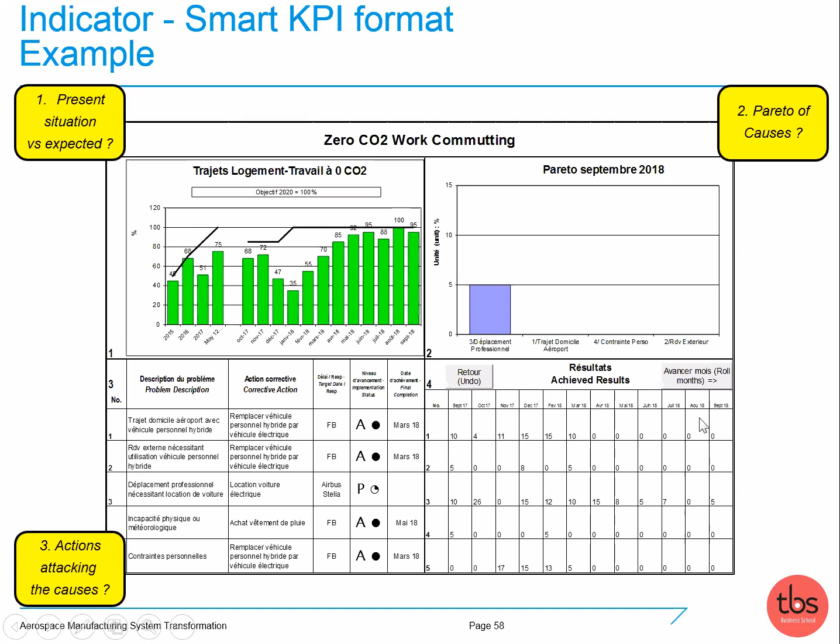So based on all these examples, I've spoken of 5S, of value stream mapping, of takt time, pull flow, 5S, KPIs. All these tools at a point of time, you need to package them in a system. Otherwise, it becomes difficult for the employees in the company to know where to find the answer when they have a problem, which tool to use and how to deploy it. So companies, after some time, are implementing systems, and in 2013, we implemented in Aerolia what we call AES, for Aerolia Excellence System, which was an organized structure for all the tools of the lean manufacturing way of working for Aerolia.

Using this, we started to deploy ambitious workshops. One of them is 3X. I will explain later on in the example section.

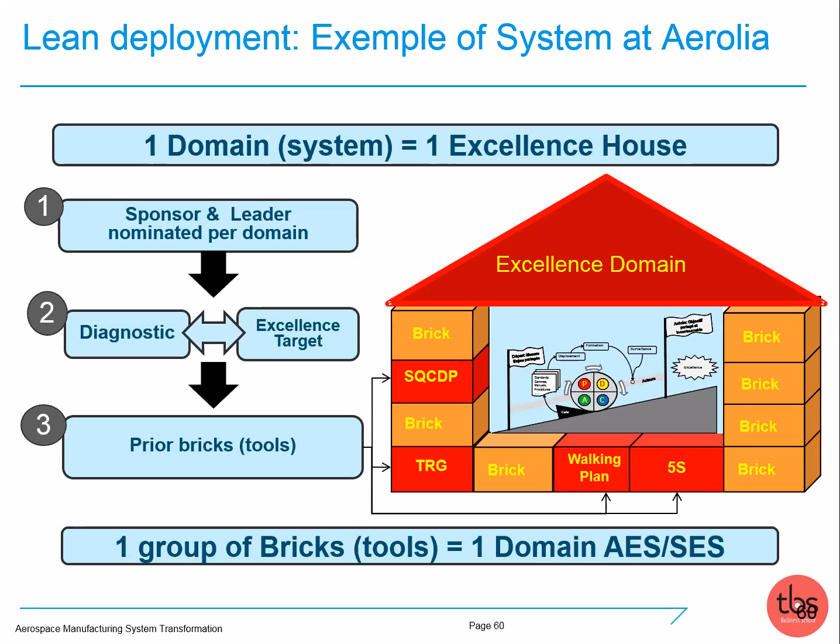Okay, these are very small illustrations of the bricks of the different methodologies of the AES system, but I will not go in detail. You see that you have tool bricks for each domain of the company: production control, logistics, safety, financial management. So it's not just manufacturing. We start with manufacturing, but obviously it goes much further than just the manufacturing scope.

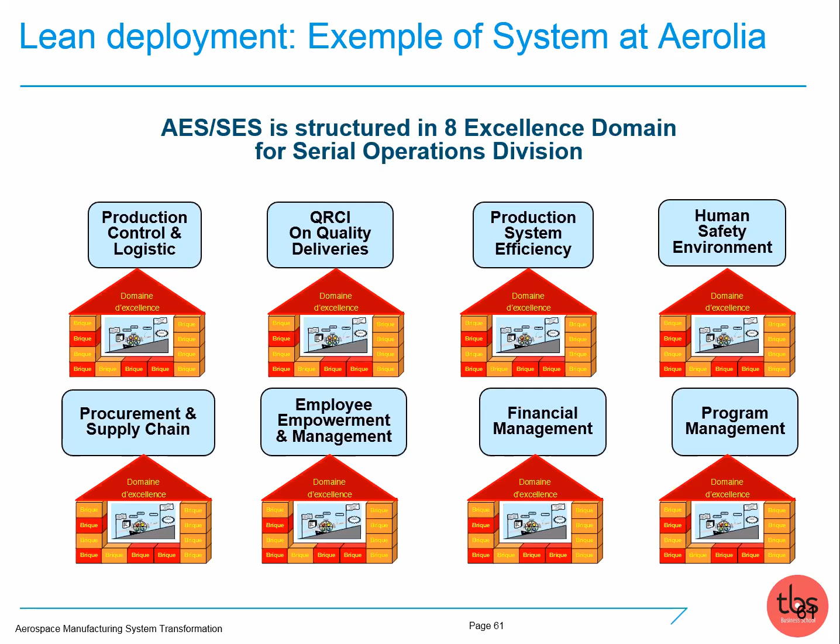So is land farmer common sense? Is this lean or not? Having a land farmer common sense, bon sens paysan for the French speakers, is this lean? Is it a kind of lean DNA, lean mindset or not?

The definition of operating standard with an expert. So giving the expert the responsibility to define an operating standard. Is this a lean mindset, or not a lean mindset?

Searching for the perfect solution, the solution that will solve 100% of the issue. Is this a lean mindset? Is this in line with lean manufacturing, yes or no?

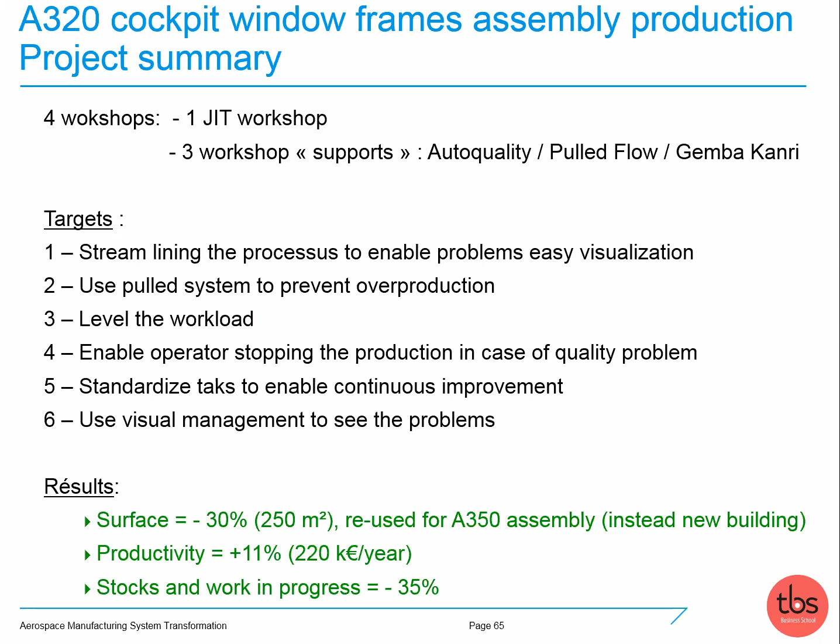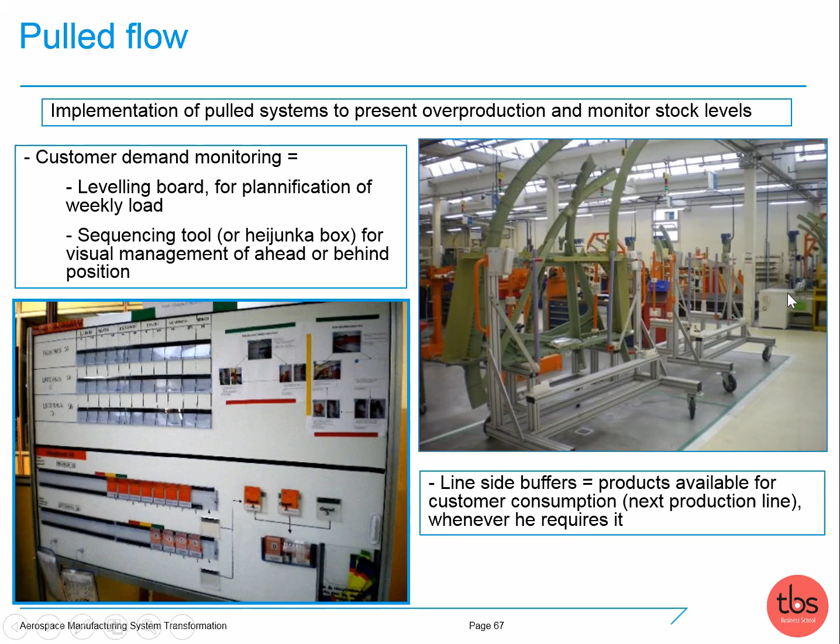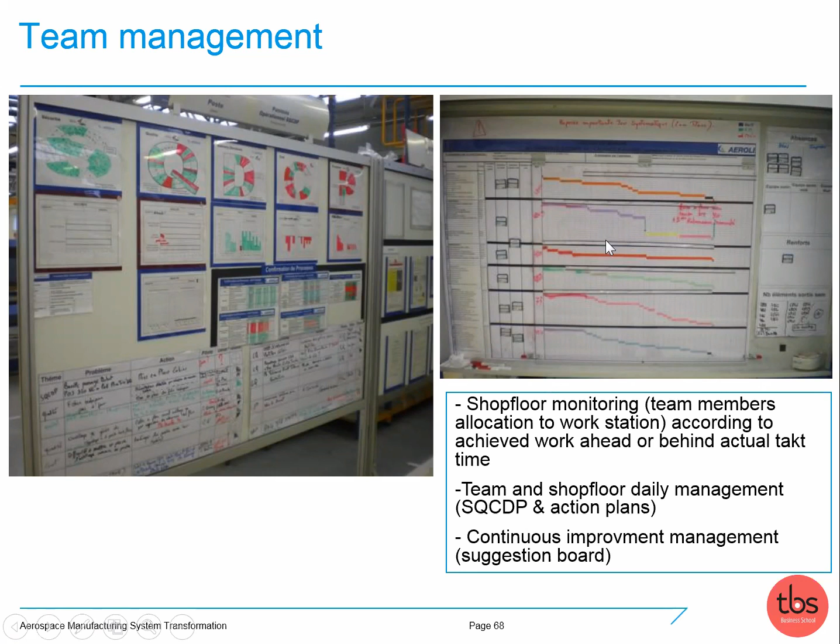And you have here the work balance for the operators that enables the team leader to visually see if one operator is ahead or behind schedule. When that's the case, operators move from one station to another, helping to balance the workload and achieve their aircraft on time.

Second example: setup of a new plant in the United Arab Emirates. Aerolia had gained a market of engineering transfer to support the emergence of a complete new plant in the desert close to Abu Dhabi. This plant was given thanks to a compensation market, which I explained an hour ago.

Abu Dhabi's Etihad had bought a lot of A330s, and they had negotiated that against this big sale, Airbus would give aerospace industrial activity to the Emirates. So Airbus had the job to set up a plant and transfer some activity for the UAE to gain this Tier 1 aerostructure supply activity.

The target was to define the complete plant layout, the machines, all the detail of operating mode, and logistics supply chain mode, using the lean manufacturing experience and milling experience of Aerolia, so that it would be a benchmark plant for the Abu Dhabi Emirates.

The result was a 3,000 man-hour engineering mission that included my expatriation on site - no, I'm not part of the 3,000 man-hours, I'm on top of the 3,000 man-hours.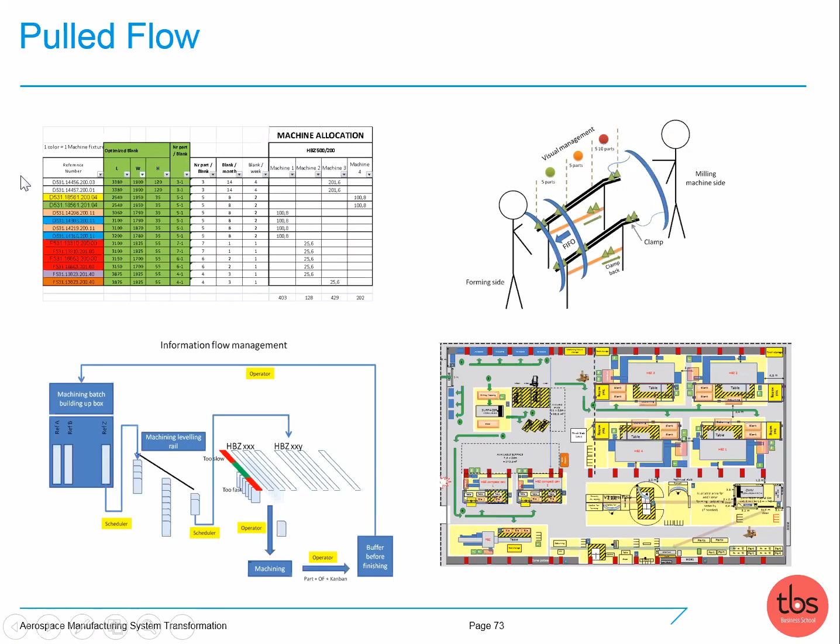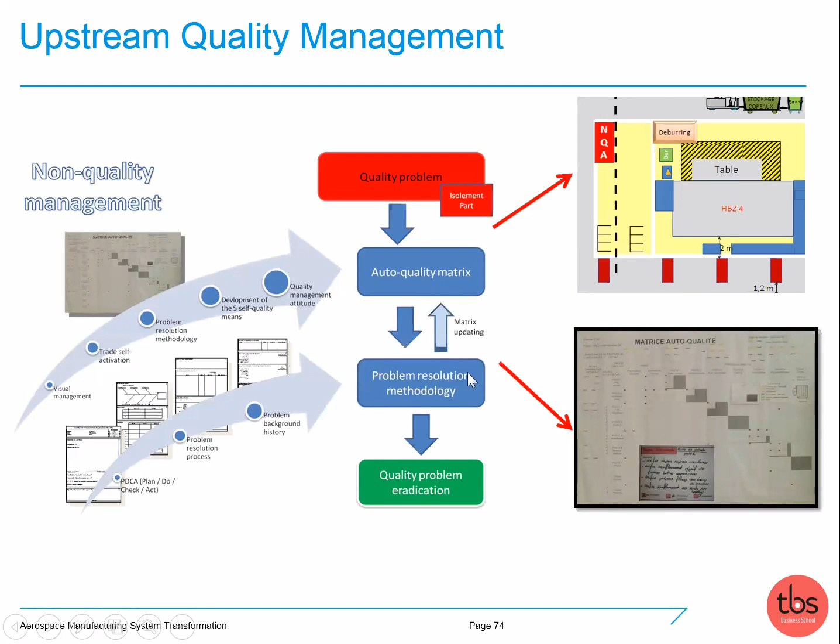You have here detailed analysis of man-machine synchronization to minimize the cost of man aside the machine and to optimize the use of the machine with different proposals. You have here simple sketches of how to handle the product, principles of a Kanban system, takt time and machine allocation tables, auto quality matrix, so ways of working to drive the autonomy of operators on the shop floor. Big project.

Last and third example, 3X factory of the future in Stelia Aerospace. This was probably the biggest project ever in Stelia on lean manufacturing. It was a massive shop floor engineering project to transform in a 3 years' time the complete assembly halls of Stelia Aerospace Meaulte location between Paris and Lille on the 4 programs at that time: A380, A350, A330, and A320.

To move from a multi-program techno-oriented push mode to a single program customer-oriented pull mode system. Before, the organization was techno, so depending on the technology, there were halls dedicated to technology that were manufacturing the corresponding pieces for the 4 programs. After the change, there's 1 hall per program doing the entire scope of assembly operation of a single program, aligned with a single customer at the Airbus site, which is the full assembly of the fuselage.

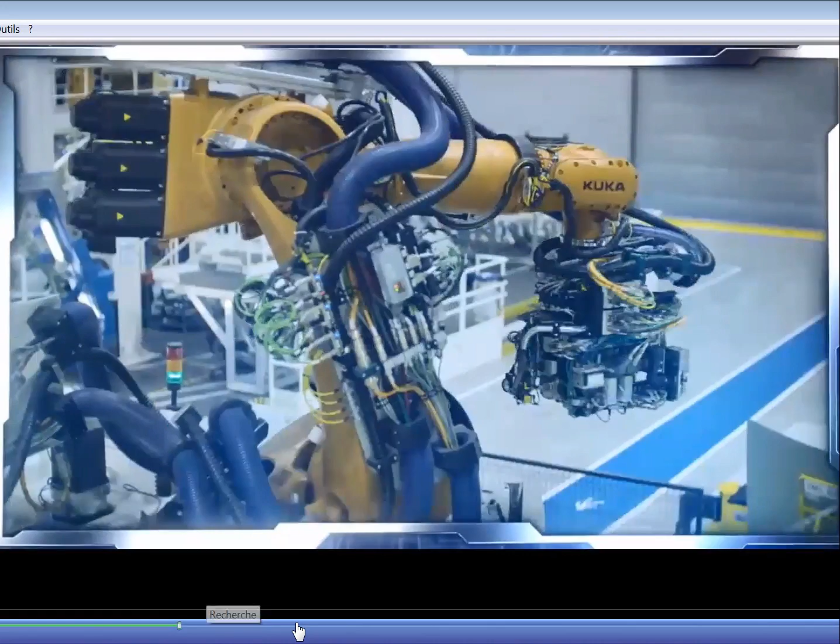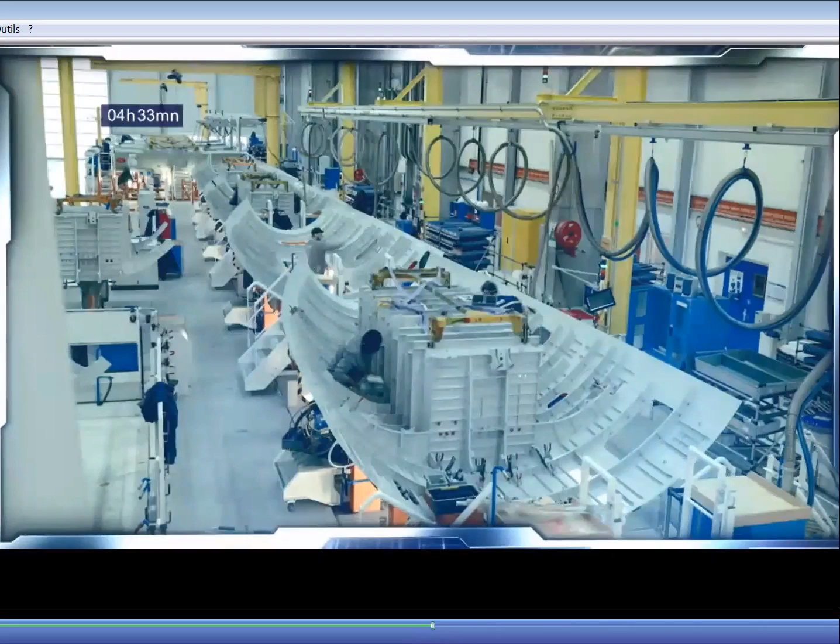Of course, it's accelerated - you can see the timing top left. This is the front fuselage, the lower part. The box is for the landing gear track, the front landing gear track. This is the cockpit line, the rotating moving line.

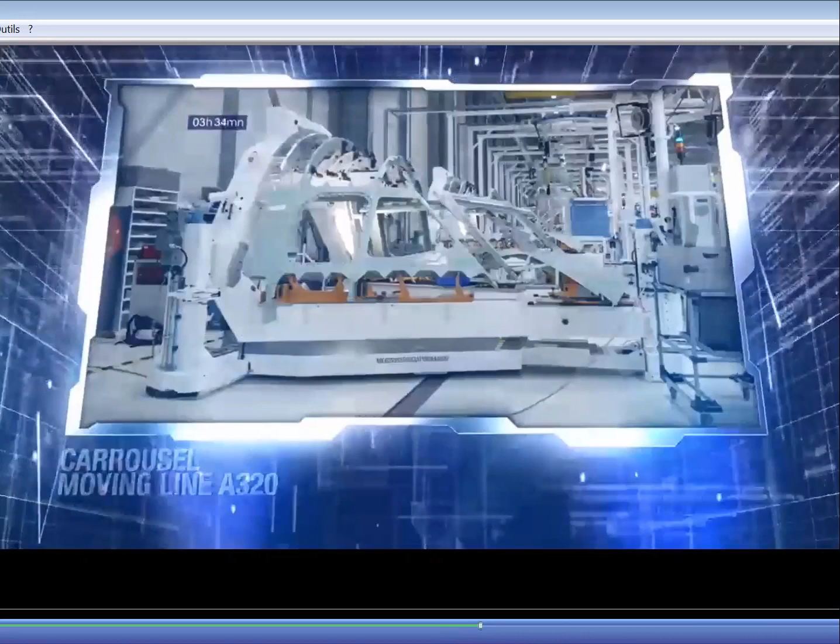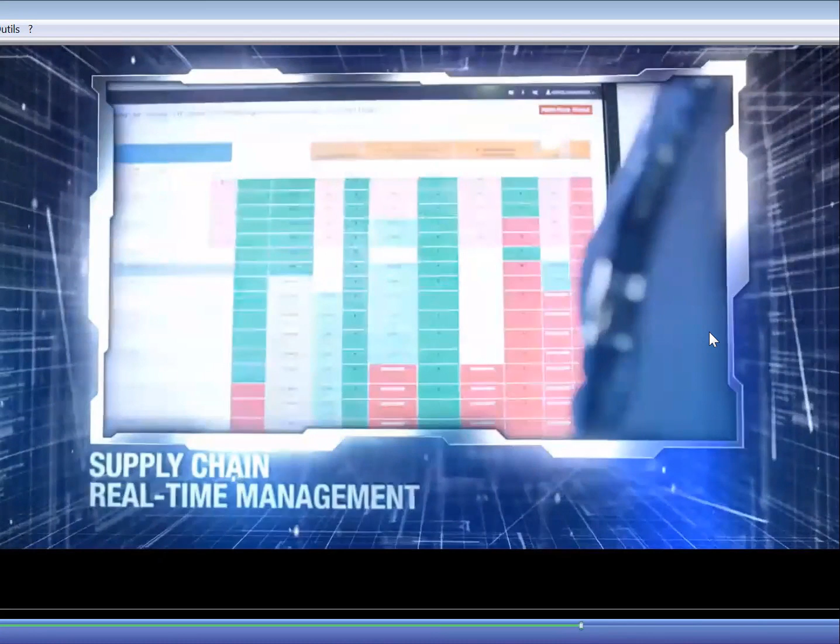There are many supply chain tools using digital techniques to enable the supply of each and every component in the right time, in the right place.

You see the Kanban system. There are still simple visual management tools.

Also using the digital mockup to simulate assembly.

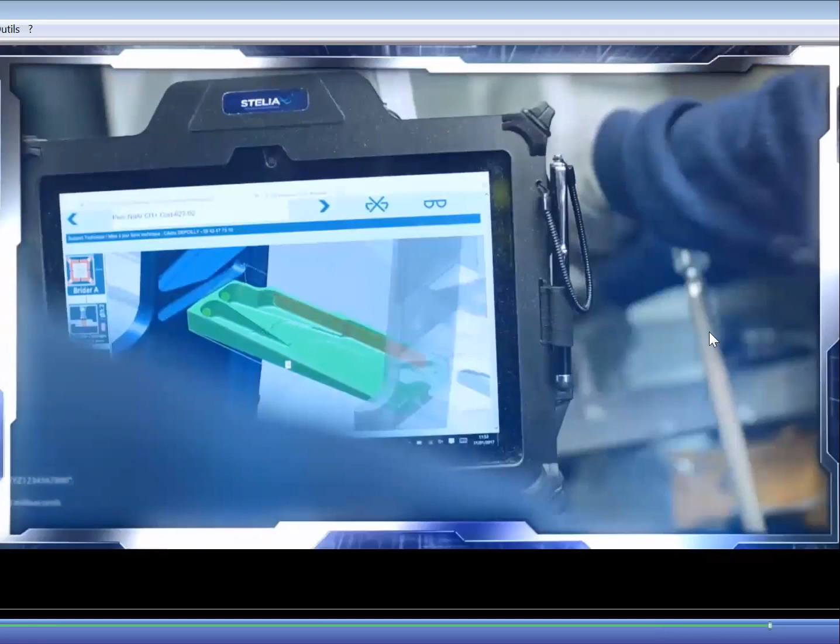Augmented reality is also used to avoid quality mistakes in the assembly of brackets.

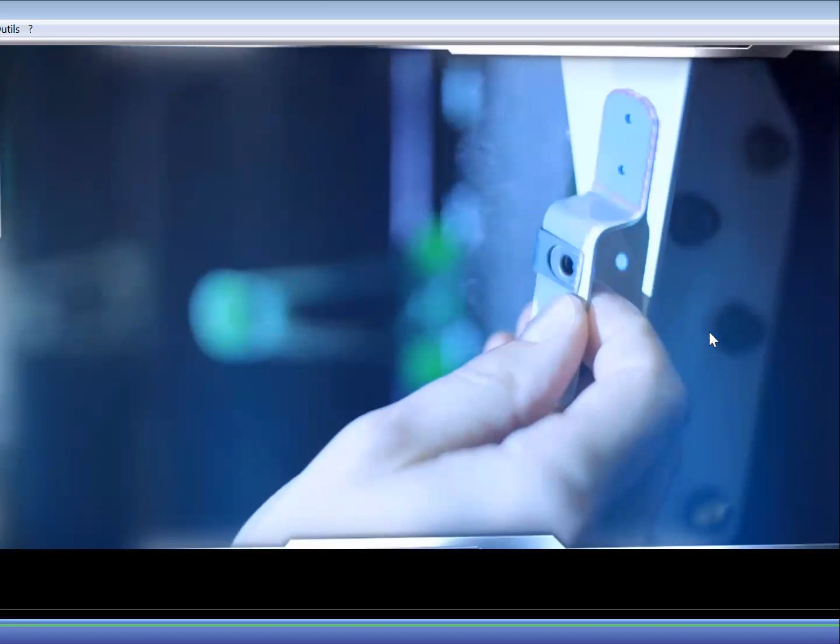Okay, conclusion. The fundamentals in the aerospace industry. You hear me correctly?

Yes, yeah, okay. So as a conclusion, as you understand now, it's a sector with a strong product identity, with a big priority on technical matters, engineering, technology, with a history of vertical management.

All what I told you about, in theory and in Aerolia, are tools and methods - 5S, value stream mapping, pull flow, all this is tools and system. Depending on your company, depending on the market, you will put more light on some, you will start with some or others. It depends, it's a toolbox. But this toolbox needs to be deployed on foundations. And the foundations are the 3 principles and the 7 concepts.

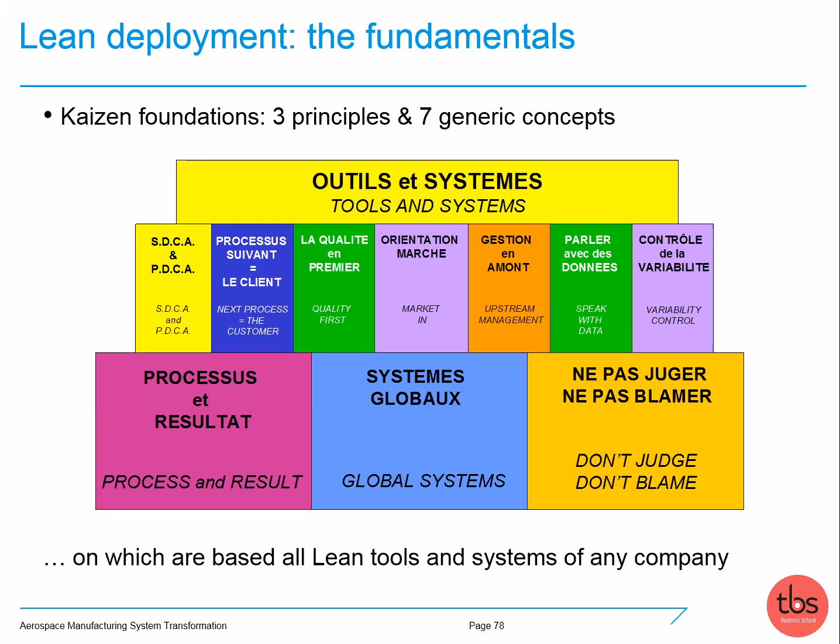I will not detail the system or the concept. I will let you see. They are easy to understand, and I'm sure you can read in books to know about that.

We'll finish with the workshop. The workshop, sometimes called the Kaizen event, is key. Why? Because it's just a methodology to deploy the tools and to work around improvement on the Gemba, being the place where the added value is created. So a shop floor is the Gemba place for a production plant.

A design office is the Gemba place for a designer team. And a workshop is the methodology that is fast, based on observation and action, using the support of management, and taking place on the Gemba in a short time frame that forces people to act and get results.

This is key. We used it a lot in aerospace, and it has its place as a fundamental tool to deploy.

So in a nutshell, we have launched Lean in the 21st century in aerospace. Even though the sector is specific, we can use the key enablers: training, involving the operators, not ignoring the unions, better involving them, acting upstream given the long lead time of 8 years development. If you don't work on the upstream topics with the new product, you will not have the money to change the complete shop floor.

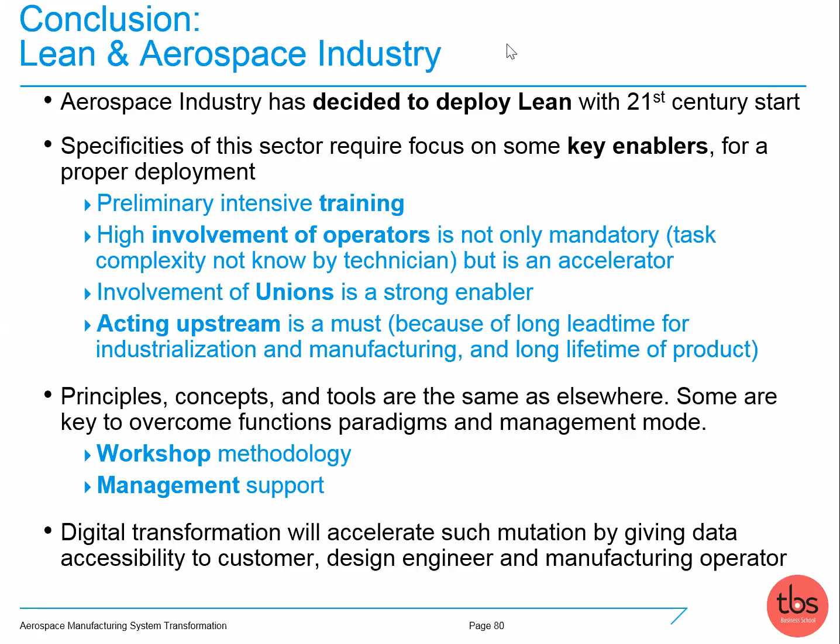I'm available for questions, so those who have time, we will not spend 5 hours, but if there are questions for 30 minutes or an hour, I'm happy to.